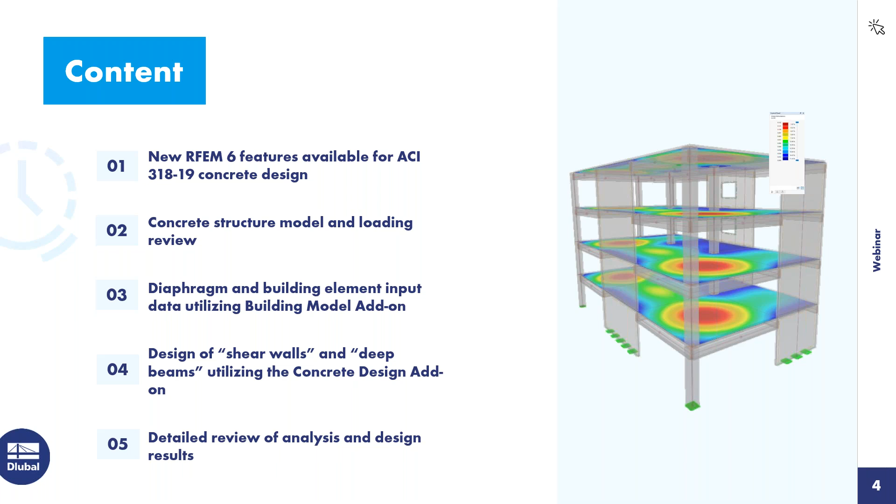So for those of you not familiar with our program and the add-on concept, I do want to quickly explain that for structure design related to concrete. RFEM 6 is the base program. This allows us to fully model the structure. We can integrate with BIM software. We have access to all the materials and the cross sections in the library. And this is also valid for hybrid structures as well. We can load it and then we can get a full static analysis.

If we want to take this a step further to design the columns, the beams, or the surfaces, we do need the concrete design add-on that will carry out the design according to the ACI or the CSA or other international standards. We then have the building model add-on. RFEM is a general FEA program, but this building model add-on will release these building-specific features that give us the ability to define stories as well as shear walls and deep beams.

And finally, there are many other add-ons that will be relevant, but for today, I just want to mention a couple others that will be used in our example for dynamic analysis. This includes the modal analysis add-on and the response spectrum analysis add-on to generate those seismic forces. We won't be going into detail on these add-ons today, but we certainly have previous recorded webinars for both the ASCE 7 and the NBC that go further in depth on this topic.

Turning now to the new ACI 318 features that have been implemented since our last webinar. We now have the ability to carry out the punching shear design check. This is for column to slab and wall end to slab intersections. The current design check will only flag the user if two-way shear reinforcement is required. There currently is no input option for that two-way shear reinforcement, but we do plan to add that in the near future. We also have added additional Chapter 18 seismic design checks. Currently this is reinforcement detailing checks only, but we'll continue to expand on this in the near future, such as strong column, weak beam.

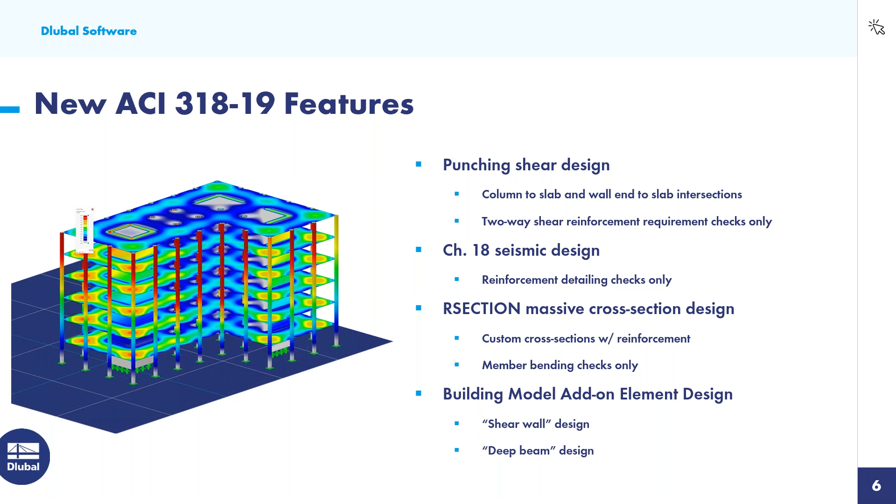And finally, we have the building model add-on that releases these building-specific features. Today we'll be focusing on shear wall design and deep beam design. So on the next slide here, let us talk a little bit more about the shear wall design that we will see in today's example.

So this does require the building model add-on integration in addition to the concrete design add-on. Essentially, we draw these shear walls with 2D surfaces within RFEM. Well, when we define it as a shear wall, what's happening underneath the hood is that a result beam is going to be created. And a result beam just simply sums up the internal forces across this 2D surface and presents it as a beam type manner.

Well, we also can input the reinforcement under the shear wall dialog box. We have added this new cross ties input. Again, we'll see it in our example today. As far as the design checks, we will refer to Chapter 11 for the in-plane design checks, as well as out-of-plane, in particular, Section 11.5. We'll carry out additional Chapter 11 detailing requirements such as spacing, minimum reinforcement, and as mentioned, we also have these Chapter 18 seismic detailing requirements where we'll go ahead and check the spacing and minimum reinforcement requirements here as well.

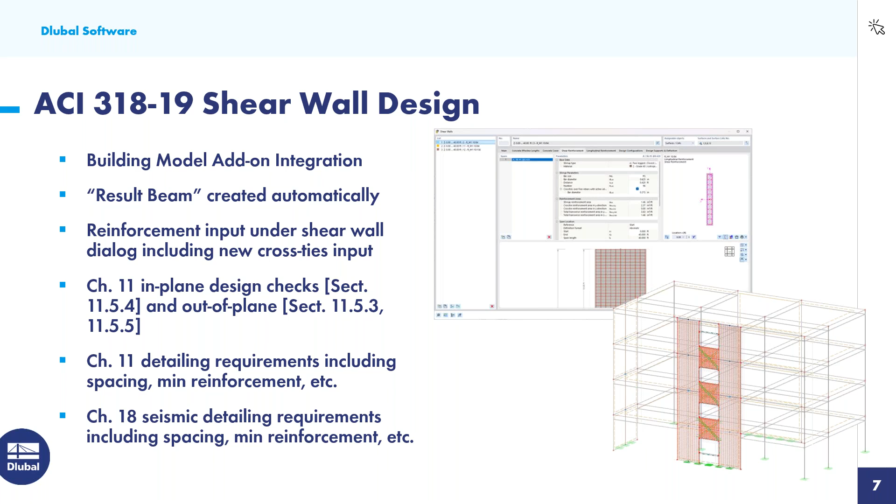Now, deep beam design follows very similar to the shear wall workflow in the fact that we do need the building model add-on integration. Very similar, this is also defined as a 2D surface. We create this result beam underneath the hood, but instead of a vertical result beam for our shear wall, we have a horizontal result beam here to sum up all of the internal forces so that we can easily design this. The reinforcement input options are also available under the deep beam dialog box, and we have added the new diagonal coupling reinforcement input.

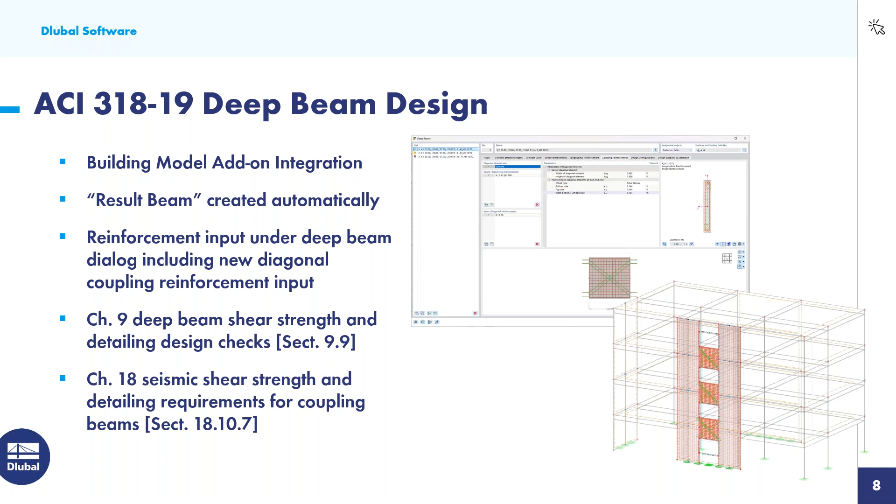As far as the design checks, we will refer to Chapter 9 for deep beam shear strength and detailing design checks, and we can also consider those Chapter 18 seismic shear strength and detailing requirements for coupling beams. So with that said, we will now turn to our example within RFEM.

So when we begin a new model, we are presented here with the base data dialog box. Under the second tab are all of the various add-ons that we have available. So essentially, you're creating a custom software package that's specific for your design needs. Now, for today's example, I do want to begin by enabling the concrete design add-on, and then we also talked a little bit about those dynamic analysis add-ons that we'll utilize in our example here.

Under the third tab for standards, we can generate the load combinations automatically according to the ASCE 7. You'll notice here the latest 2022 standard is implemented. We'll also take advantage of our automatic wind load generators as well as snow load generators. So we can set the standard here under the second option also to the ASCE 7. The concrete design is set to ACI 318, the 2019 standard, but you can see here the alternative standards that we have offered, including the CSA. And finally, dynamic analysis for the response spectrum analysis will be carried out according to ASCE 7.

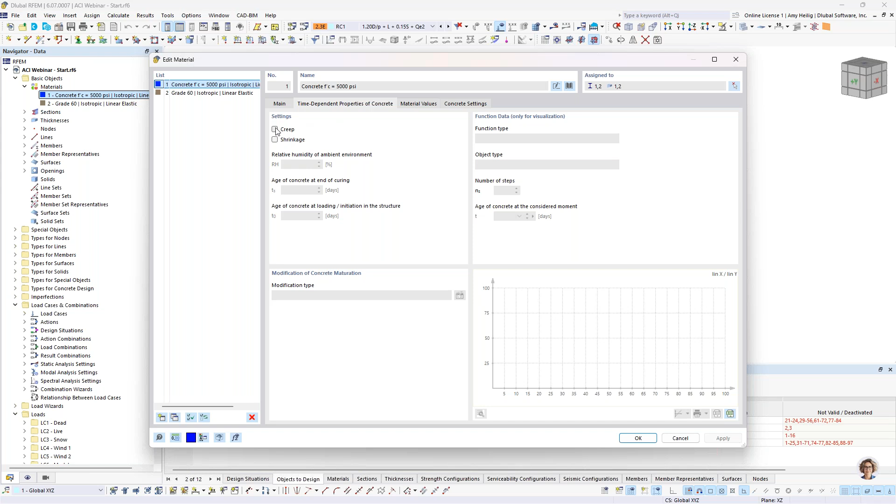So now that we have this information set, you'll notice here that I have gone ahead and modeled our concrete structure for today. So let's do a quick overview. We'll begin with the materials. Everything is defined here with 5,000 PSI concrete that was pulled in from our material library. Now, specific to concrete, we do have this second tab available under time-dependent properties of concrete, where we can further specify the creep and shrinkage behavior of this material. This will come into play later on for those time-dependent deflections. If we do specify creep and shrinkage, we will refer to the ACI 435 for that consideration. For today, I'm not going to take advantage of anything related to the creep or shrinkage input.

So we will now move on to the cross sections. You'll notice here that the columns are defined as 20-inch by 20-inch square sections. And then we have various beams here that are supporting the slabs and spanning in between the columns. Well, if I zoom in here and I double click on one of these members, I want to point out that the member type is not set to beam. A beam is any standard column or beam element, but rather this is set to a rib. And when we specify this under the second tab, rib, we can actually define here the effective width on the left and right hand side of this beam element.

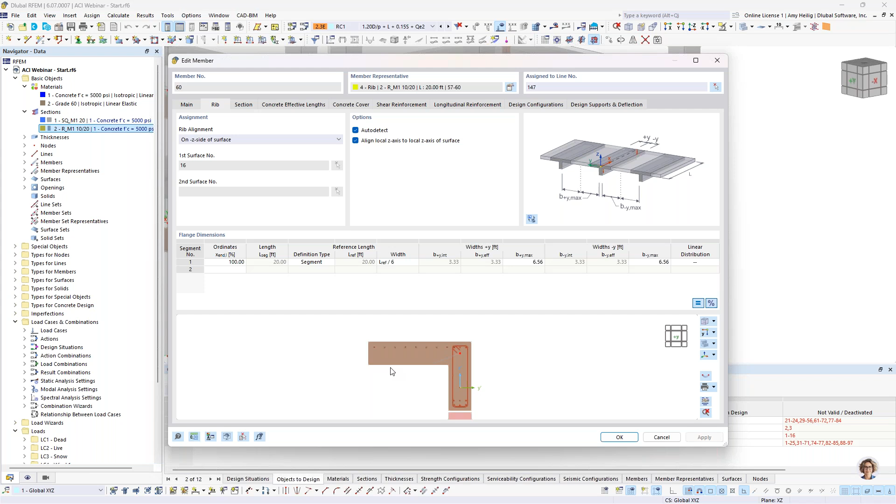So then we further have the ability to integrate the internal forces from the slab element itself from the static analysis, and then we can design it as a T-beam within the concrete design add-on. Now for this rib element, we're at the edge of a slab, so we only have effective width defined here over on the left-hand side. But this is unique to rib elements rather, again, than a standard beam element.

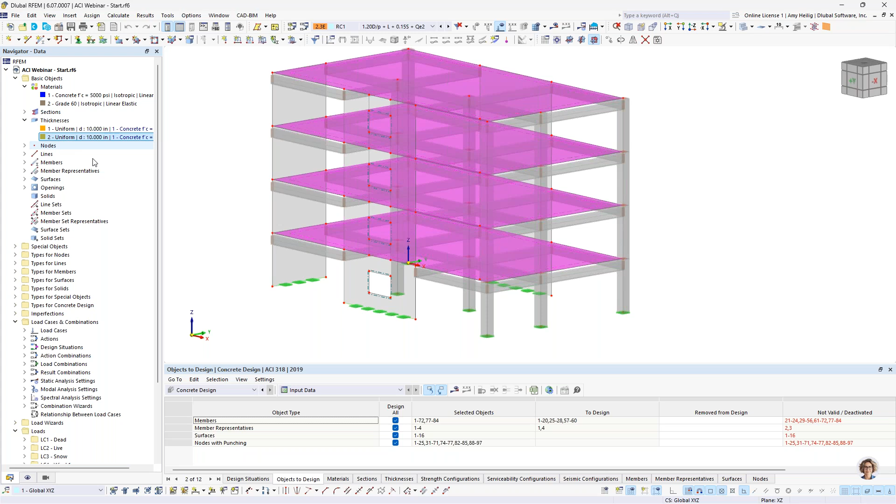We also have the thicknesses defined here. So the thicknesses are assigned to the surfaces. For our shear walls, we have 10-inch thick concrete defined, and then for our slab elements, these are also 10-inch 5,000 PSI concrete. Down at the base of the structure, we have nodal supports at the columns that are rigid, and then we also have a fully rigid support at the base of our surfaces here that are defined as a line support. So we'll now move on to a loading overview.

So going into the load cases and combinations dialog box, you'll notice under the load cases that I have defined here dead, live, snow, and wind. So these are our static load cases that once we have these defined here within this dialog box, we would actually need to apply the loads graphically to the structure. So we'll go ahead and back out here and take a look within our drop down at the dead load case. Now, self-weight is automatically considered internally for all of the elements, but I have added an additional surface load here of 50 pounds per square foot.

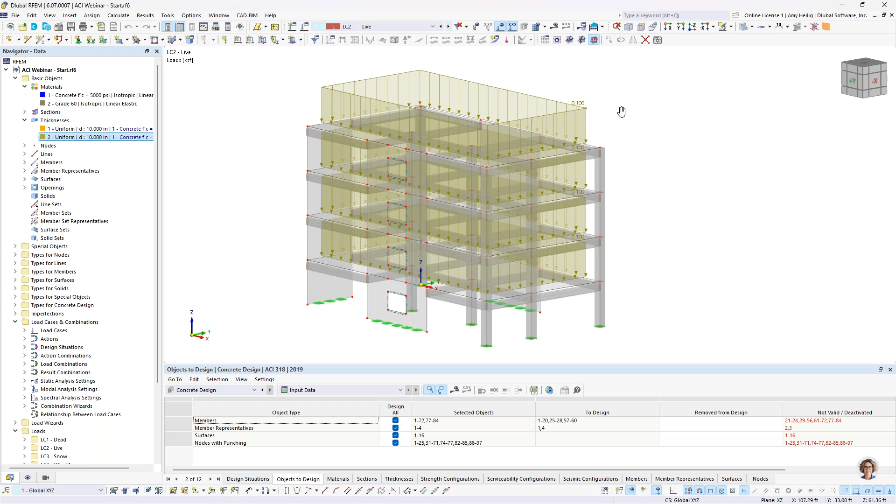Now, we are not confined to applying a surface load, as you can see up here with this option in our toolbar, to the entire surface itself. Rather, we also have these options right next to it called free loads. So for example, a new free rectangular load could be applied to just a certain portion of the surface rather than the entire surface as a whole. We also have the live load case here, same concept. The magnitude for the surface load was increased to 100 pounds per square foot.

Then we have our snow load here at our roof level. And for this, I took advantage of the load wizards that you'll find over here in our dialog box. And under the load wizards, if you remember, we set this to the ASCE 7 so that we can automatically generate the snow and wind loads. So if I go into this dialog box here, you'll notice that we just specified the geometry, we input the parameters specific to the ASCE 7, and ultimately the program is going to calculate these snow loads for us.

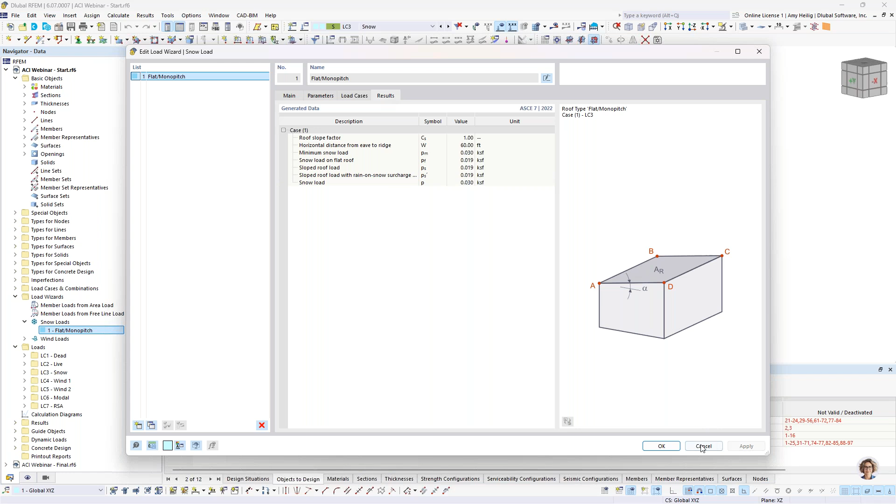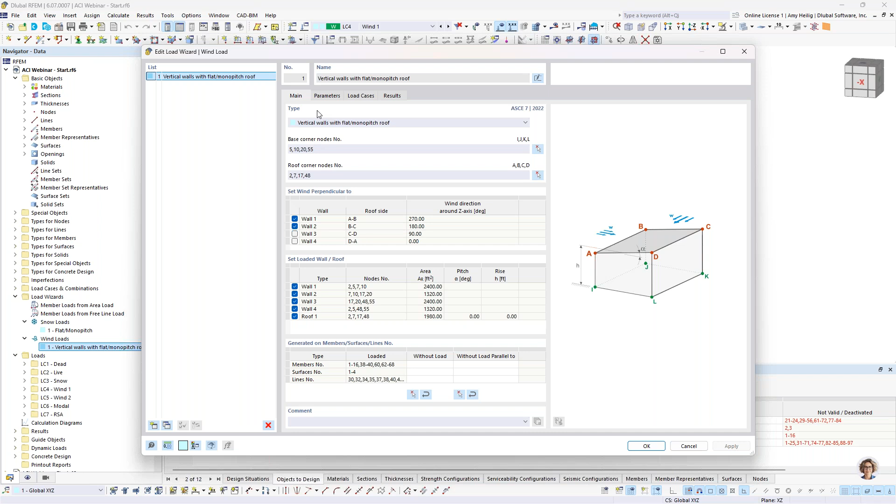Now, very similar, we have our wind load generator. So if I toggle here to my wind load case, we see this applied lateral load. And I'll go into the wind load dialog box here. Again, we input the geometry points, the type of roof. We'll input the parameters specific to the ASCE 7, and then the program can generate all of the wind load cases from case 1 and case 3 from the ASCE 7. For this simple example, I am just generating the minimum wind loads in both directions, so that's why you can see everything else is unchecked here.

So for our first minimum wind load, we can see this applied area load laterally here in the global Y direction. If I'm interested, I can always right click to display separately, which is going to show me the loads applied to the structure based on the tributary areas. Now, if I'd prefer, I can turn this back off if I would like a cleaner area load display instead. And then similarly, we have wind load in the other direction with that applied area load.

So going back to our load cases and combinations, I also have a couple of dynamic load cases here as well. Again, I'm not going into detail with this. This is covered in those previous webinars you can find on both our website and YouTube channel, but we do have a modal analysis load case where we're going to carry out the eigenvalue analysis to determine the natural frequencies, vibrations, mode shapes of the structure. We can import here a mass combination for this calculation.

And then we also have our response spectrum analysis load case. So we're going to refer to the ASCE 7 here to generate these seismic loads in the orthogonal X and Y directions. And ultimately, once we have all of these load cases set, we need to combine them into the load combinations.

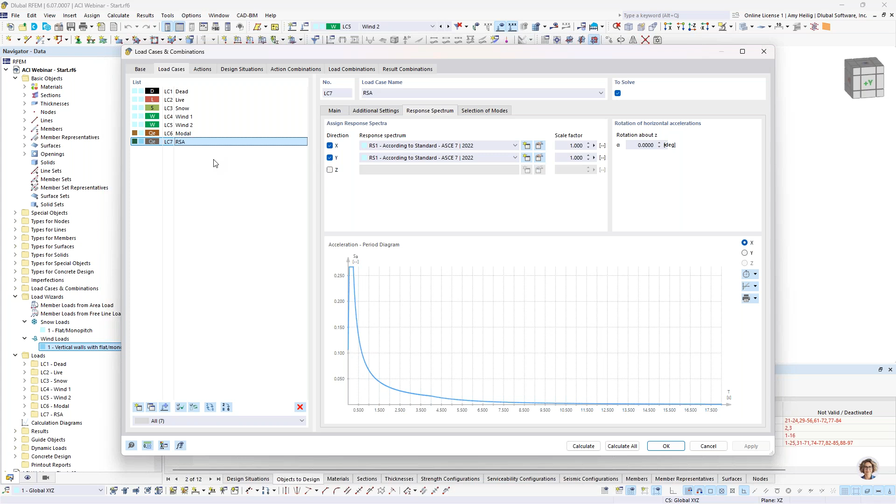So under the design situations here, you can see that the program is automatically going to group together these load combinations in what we call a design situation. So we have our first two design situations here in orange that are going to include our factored load combinations from the ASCE 7, 1 through 5.

And then this second factored design situation is going to include all of our seismic loads. So 6 and 7, again, directly from the ASCE 7. We can click on this little info button here to see that information pulled directly from the standard.

Now we further have a couple design situations here for our unfactored loads. So we have the ASD load combinations 1 through 7, and then we also have 8 through 10 that will include those seismic forces. Now these design situations are ultimately needed within the concrete design add-on, and we'll see later on exactly how we assign the limit states to these different design situations. But for now, just think of these design situations, again, grouping together the load combinations.

If we're interested, we can go ahead and click on the load combinations tab, and we see the load combinations listed out here individually. Our factored load combinations in orange belonging to that first design situation. We have our unfactored load combinations here belonging to the third design situation. And we do also have enabled here the result combination.

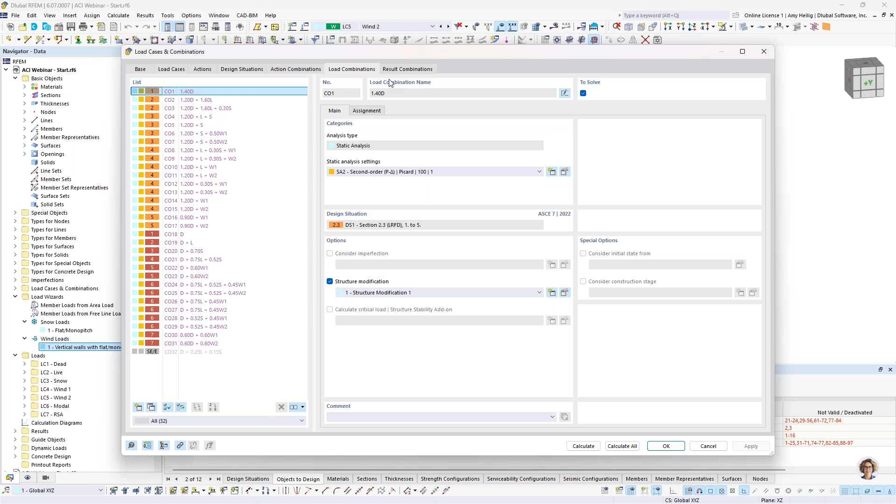So it's not possible to combine the seismic forces with the results of the other static load cases. So what I'm talking about is combining dead, live, snow with seismic. Therefore, we have to combine these results linearly in what we call a result combination. This is different than a load combination that is automatically going to be carried out according to a second order analysis considering P-delta effects. Again, this is covered in that response spectrum analysis webinar, but ultimately these result combinations also belong to those design situations.

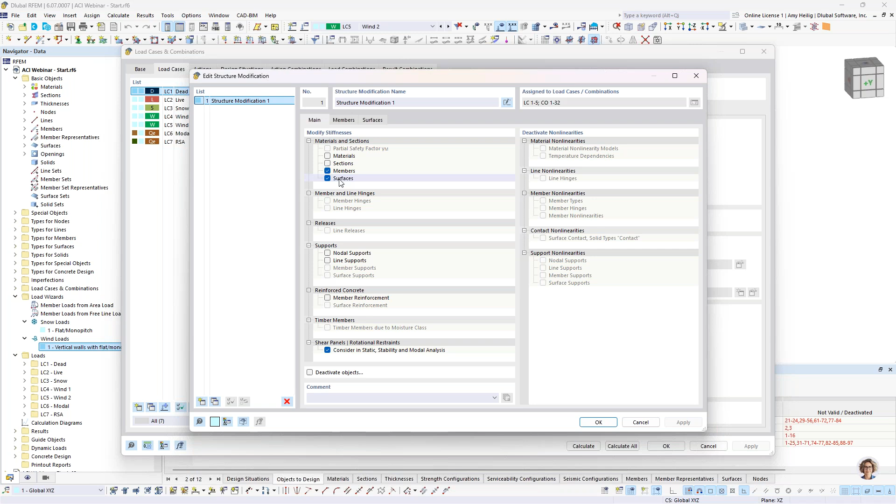So one more thing I want to touch on is that you'll notice that for the load cases, I have a structure modification set here, and this is really important for concrete design. If we go in and take a look at this definition, I have enabled both members and surfaces because these are the two elements that we have in our model today. And then I get two additional tabs up here at the top.

Well, within my first definition type here for members, what we have the ability to do is to directly select here the ACI 318. And this is going to refer to table 6.6.3.1.1(a) to apply those I-crack factors to our member elements within the model. We would want to select whether this is a column or a beam, and we can see the relevant stiffness modification factors given here. So once we have this definition, then we can graphically select all of the column elements within the model that this stiffness reduction should be applied to. Same exact concept here for our beam elements.

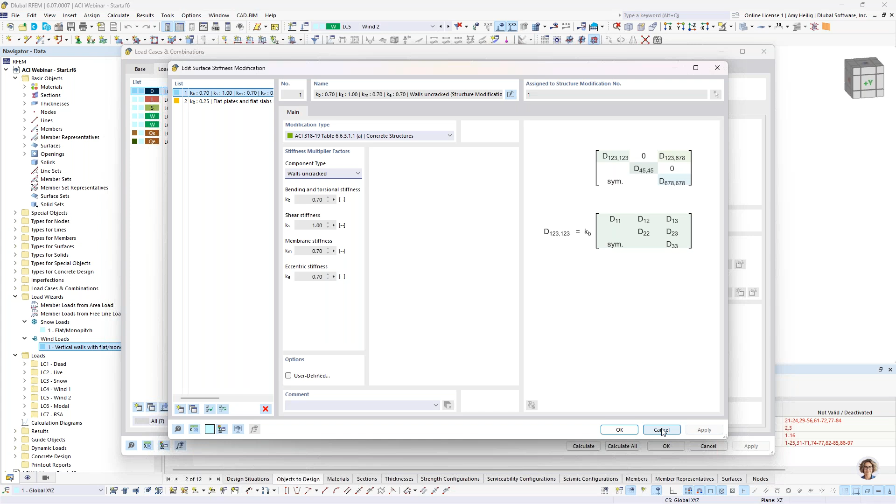And in a very similar manner, we also have the surfaces tab here, where I created my first definition by simply selecting the ACI from this dropdown, and then I would choose whether it's walls uncracked, walls cracked, flat plates, or flat slabs. This refers directly to the ACI for those I-crack factors, and then we can graphically select the surfaces that this stiffness reduction should apply to. So we could go ahead and apply this to all of our load cases.

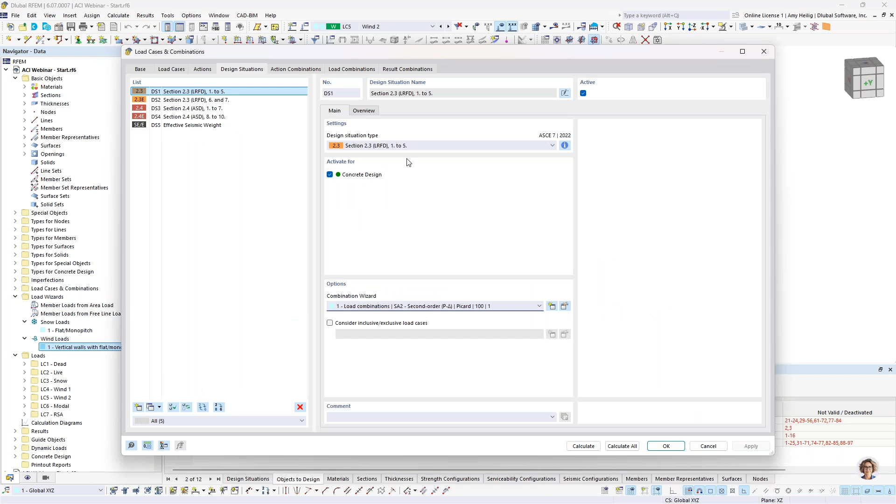It's also possible here under our design situations, especially these factored design situations, that we go in here to the combination wizard options and we activate this structure modification here as well. So by doing it within the design situation, you'll see here that the load combinations automatically include those I-crack factor stiffness reductions as well.

So now that we have covered the loading and the structure, it's now time to input the reinforcement that's specific to the concrete design add-on that we have already enabled within the base data dialog box. So before we begin, what you'll notice here is that we do have the concrete design option available within the dropdown of our table. So when we select this, there is this option here called global settings.

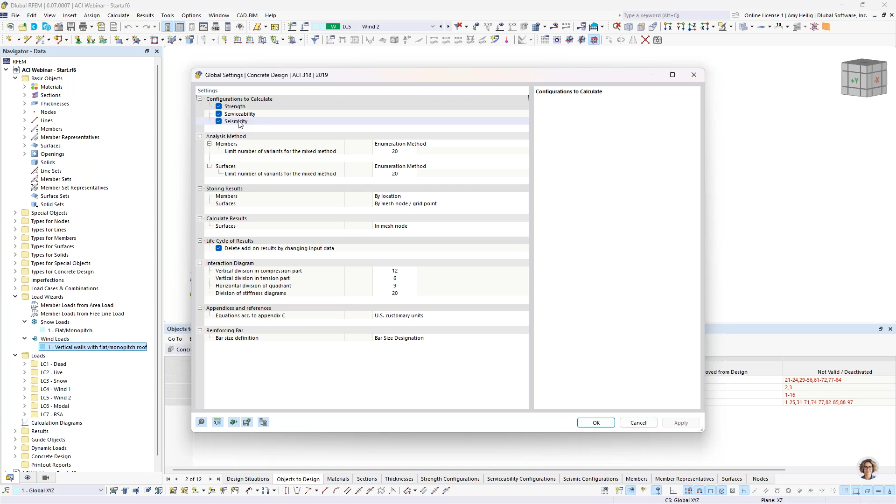Now, by default, the strength and serviceability design checks will always be carried out. But if we are wanting to further carry out those seismic detailing checks, we would want to go in here and turn this on because by default, this is typically not enabled. So we'll go ahead and do that for today.

Okay, so we want to talk about the reinforcement input for a column. If I double click on this column, you'll notice the design property checkbox is turned on. This tells the program that not only are we interested in carrying out the static analysis within the base program, but I also want to utilize the concrete design add-on to input the reinforcement.

Now, when I turn this off, you'll notice all of these tabs disappear, and this simply tells the program that we're only interested in the analysis. So we certainly could carry out the reinforcement input here within this single column.

But I do want to talk about the benefit of what we call member representatives. Currently I have this turned off graphically within the model, so I'll go ahead and turn that on. You'll notice that we have a lot of color-coded dots here for each one of these members. This is because the program has grouped together identical members into member representatives.

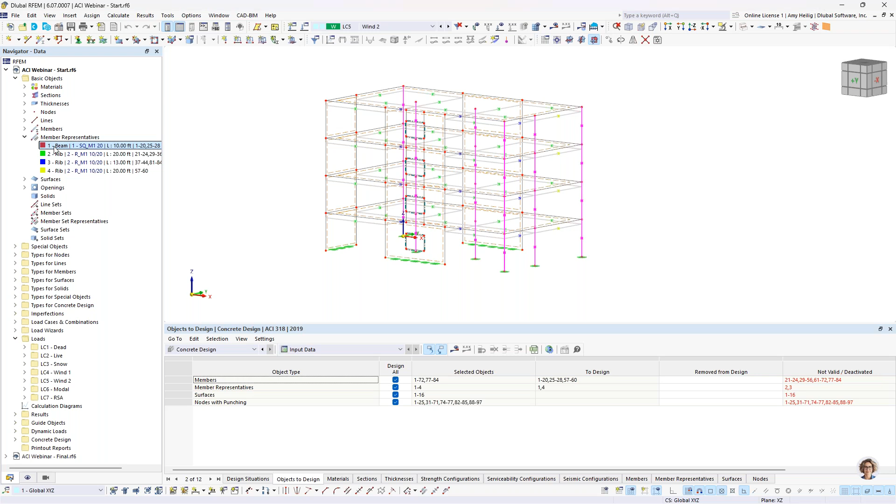So members that have identical cross sections, materials, lengths, and possibly even, for concrete, the same reinforcement input, will all be grouped together. Now the benefit is that if I take a look at member representative number 1, you'll notice that this has grouped together all of my columns. So we see this highlighted in the background.

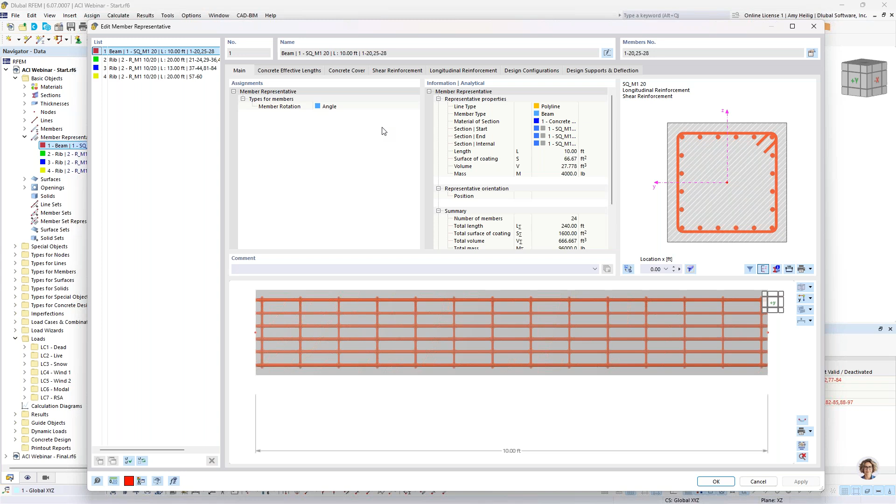I have these exact same tabs here to input the reinforcement as I do for the individual columns. The benefit is that if I define the reinforcement here within the member representative, it's applied to all columns at once. If I need to make a change, I do it within the member representative, and it will affect all the columns defined here. So we will go ahead and input these various tabs, and I'll go through these in detail.

The concrete effective length: if we are carrying out a first order analysis and utilizing the moment magnification method, we would want to go ahead and input an effective length. However, if we are designing to second order analysis and considering P-delta effects, which we are within our load combinations today, we don't really need to do anything within this particular tab. So we'll go ahead and design according to second order analysis.

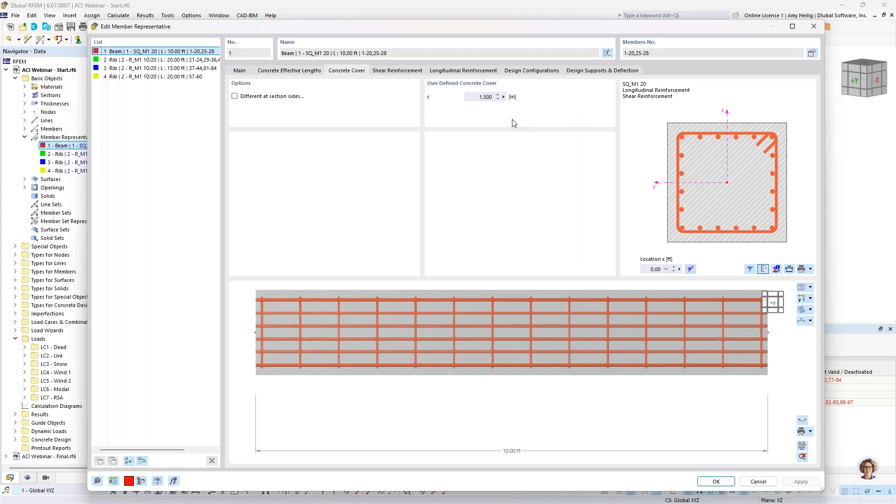Now the concrete cover should be input. This is left here at 1.5 inches, which is the default.

Now I went ahead and input the shear and longitudinal reinforcement for these members, so we'll just go ahead and give a quick overview. The shear reinforcement is set at number 4s at 9-inch spacing on center, so we can see that spaced out evenly along the member here.

Now it's entirely possible to create different zones for both our shear and our longitudinal reinforcement with this option in the lower left-hand corner, and then we can modify the span location. So for example, if we wanted closer spaced shear ties at the ends of the member versus the center, we could create a couple of different zones here.

The longitudinal reinforcement: you'll notice I have selected the option from our dropdown here as uniformly surrounding for the longitudinal bars, and I have defined 20 number 6 bars, so the program will go ahead and place these around the cross section as shown.

Now we do have additional options here to define a development length if we would like. You can see that within the dropdown box where the development length is shown graphically. We can modify that development length itself in terms of feet. For today's example, I'll go ahead and leave all the development lengths off, but that is where you would want to input that information.

Now, the design configurations - I'm only going to go through this tab once because it's the exact same application for all elements we are designing. We have here these strength configurations to begin. If I go into the default setting, you'll notice we have 4 different tabs depending on which element we're designing, whether it's a member, surface, or even punching shear. These are all the various options specific to the strength design checks according to ACI.

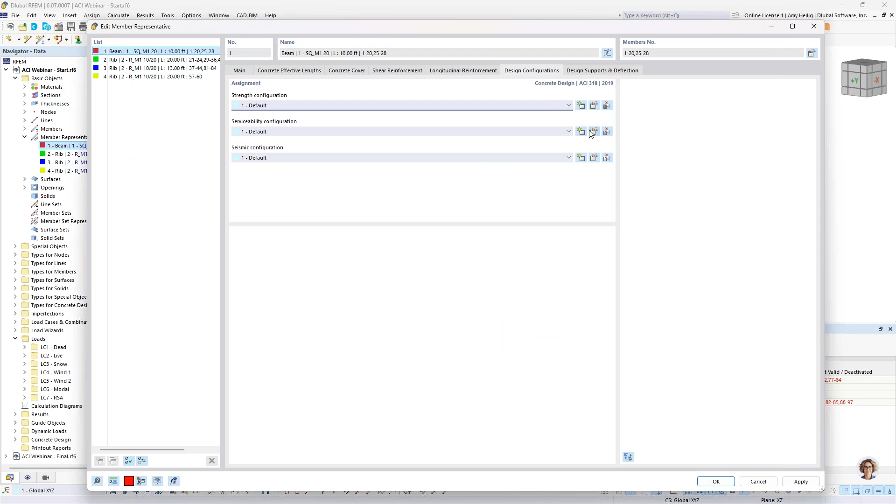We also have the serviceability configurations here, specific to the serviceability design check. For example, we can calculate the crack width. For surfaces, we have minimum reinforcement due to shrinkage and temperature. We can also check deflections, whether that is simply supported or cantilever beams or columns, and this can also be carried out for surfaces.

If you remember, we talked a bit about time-dependent deflection. I mentioned that under the material properties, when we input creep and shrinkage for that material in more detail, we probably want to toggle this to refer to ACI 435. This is a far more complex approach within the serviceability design checks for long-term deflection.

Alternatively, when we leave this as default with the factor according to ACI table 242413, we're simply going to apply some type of factor to the immediate deflection based on the duration of the load. A much more simplified approach.

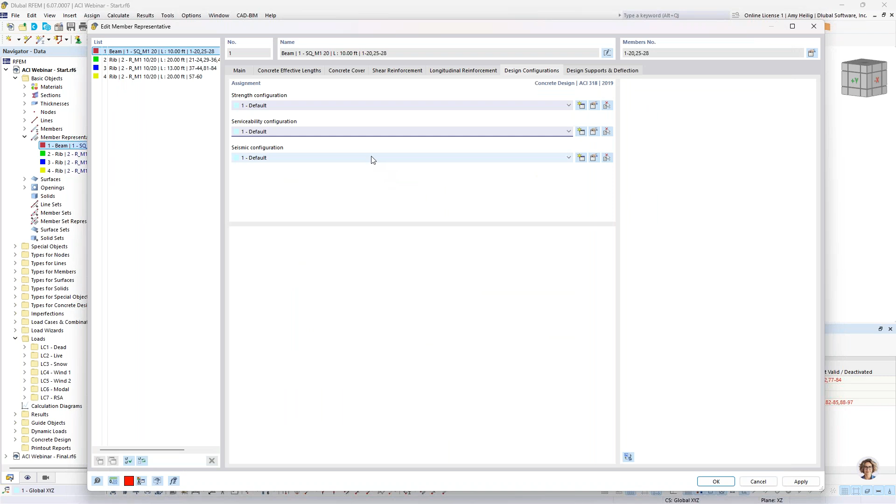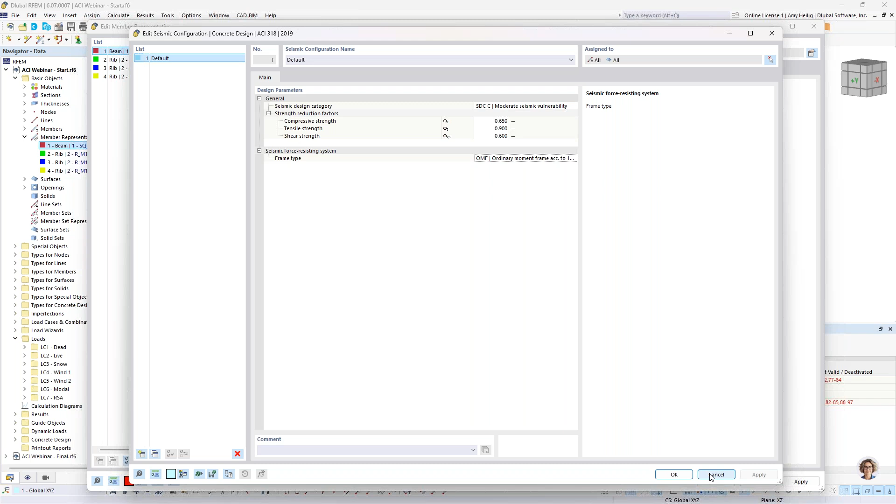Finally, we have the seismic configuration. For the seismic detailing checks, we can select for our members whether the seismic design category is one of the options from this dropdown. We also have the frame type set to ordinary, intermediate, or special moment frame, and again this is applicable to members and surfaces for those additional detailing design checks.

Finally, we have design supports and deflection. If I input nothing within this tab, the program will simply assume the member is supported at both ends, and it will refer to the limiting deflection ratio for simply supported members. In contrast, if we have a cantilever, we probably want to assign a design support at the left or right end so that the relevant deflection limit is referred to.

I am just going to leave this as simply supported for our column elements, but we'll see in a minute how we can set this differently for our rib members.

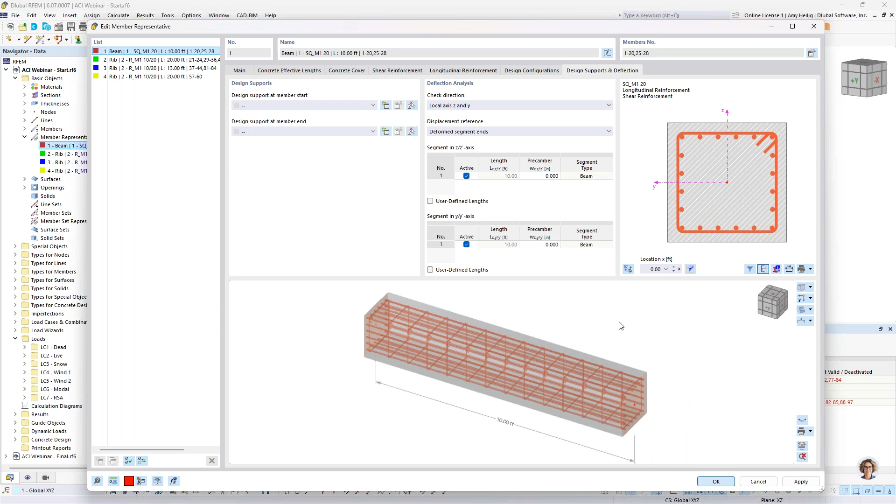Once this information is done, we want to move on to the reinforcement input for our 4 rib members over here on the right-hand side. Very similar to the columns, these are all grouped together in a member representative as well. If we take a look just to quickly review, because it's a rib member, we are going to include the effective width of the slab for the member design.

We run through these various tabs. Concrete cover is set to 1.5. The shear reinforcement is number 4, set at 6 inches. Again, we could set different zones if we would like. The longitudinal reinforcement is going to be a little bit more detailed than what we saw with the columns.

You'll notice that I have 3 number 6s set to symmetrical, so this places 3 number 6s at the top and 3 at the bottom that are currently highlighted. We also have an additional 3 number 6 bars defined here at the bottom with what we call the rebar type line.

This line option allows me to place a line of reinforcement, and I can specify the different offset either left or right or top or bottom with this input option. Finally, we have 8 number 6s defined in that surface effective width itself, also defined with the line option. I modified the offset to 8 inches so we can input this longitudinal reinforcement within the slab element. This is pretty simplified for today, because we'd probably want to create different zones with different longitudinal reinforcement, but this is just a little overview for this simple example.

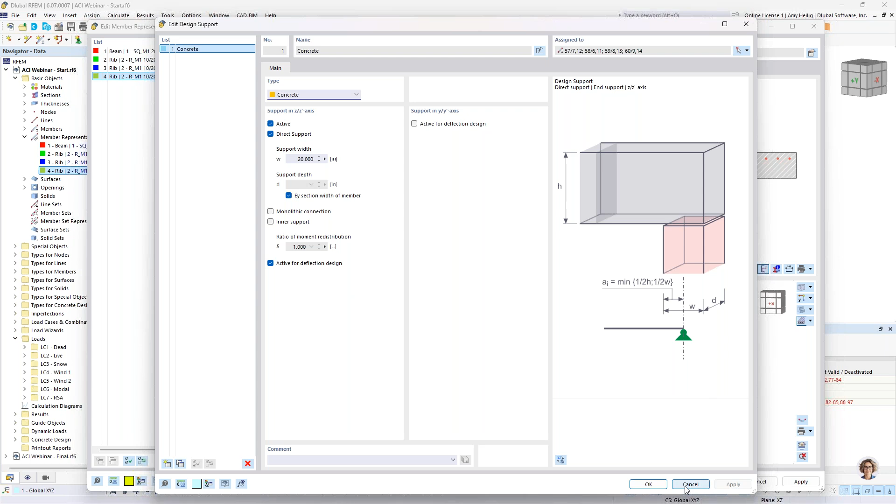So once we create that support, we can select that same definition type here at the member end, and we actually see the support shown graphically in this dialog box. So this is how we can consider that reduction of the shear force.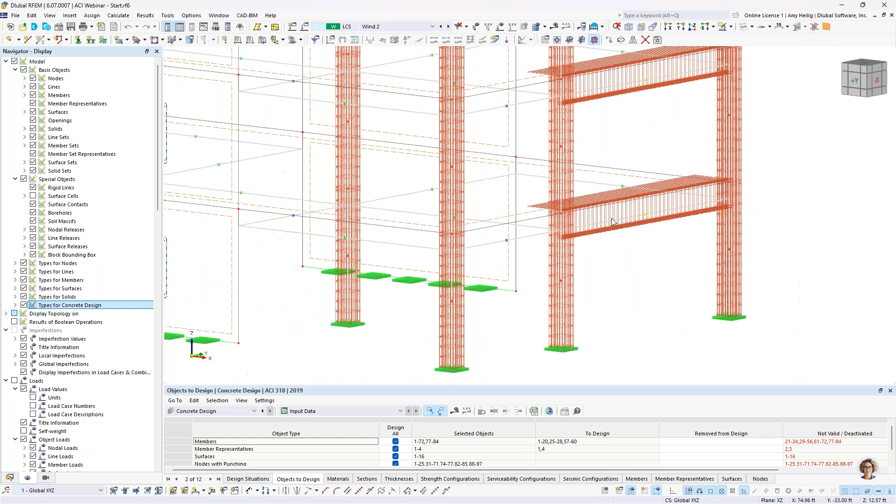Now that this information is input for our beams and columns, if I go to the second tab under the navigator and turn this into wireframe view, we can view the reinforcement that we've input graphically in the global 3D model. This is only specific to the elements I've defined so far. If it feels overwhelming, you can always turn that off.

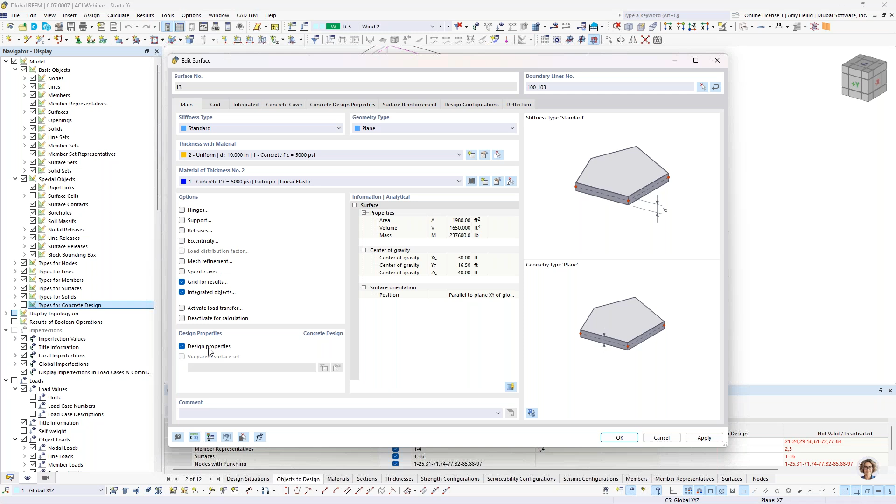Now to talk about the surface reinforcement, I'm not going to go through this in detail. It was covered in a previous webinar, but it's the exact same concept where we can activate the design properties and input the surface reinforcement.

Similarly for punching shear checks, we want to choose one of these nodes where it's framing into the reinforced slab. We double click on it, and we have a checkbox for punching design and an additional tab that refers to the strength configurations for those punching design checks. We won't be doing either of those for today's example, but I wanted to mention it.

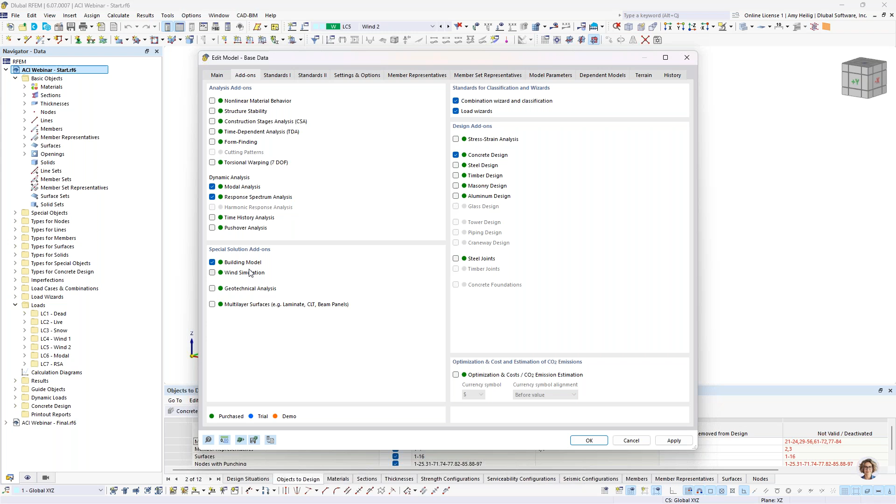So now it's time to move on to the building model add-on. I want to right click here to activate the base data dialog box, and under the add-ons we'll turn on the building model add-on. I click OK, and at first glance nothing changes graphically here.

The only thing we now have access to in the navigator on the left is a new folder called the building model, so we can now define our building stories in this general FEA program. I'll go ahead and double click on this dialog box.

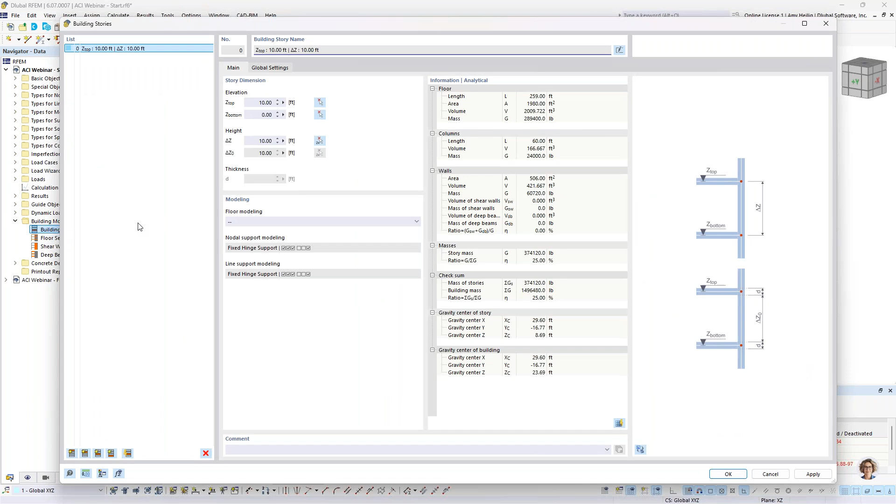The program will automatically assume we want to create our first story, and it detects the height of that first level. We'll continue to create the additional stories above it using the option in the lower left-hand corner, for a total of 4 different floors.

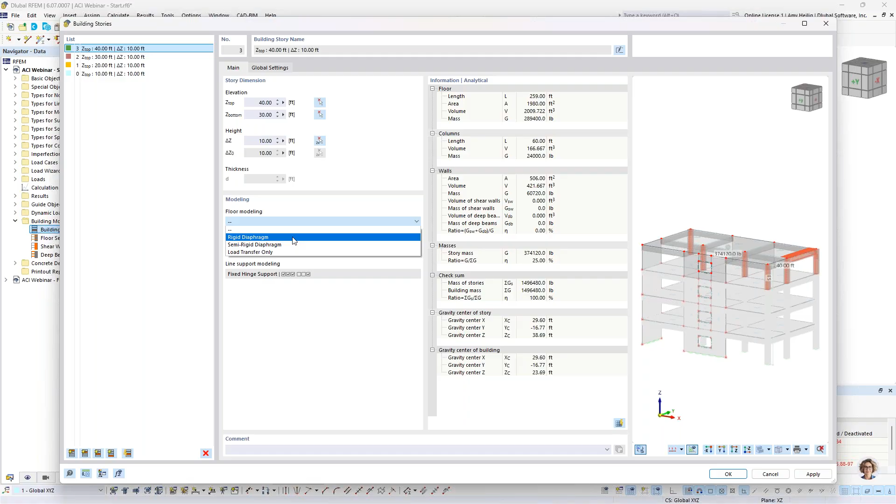Once we've created the different stories, for each floor we now have the ability to assign a diaphragm to that particular floor or to all of the floors, including rigid, semi-rigid, and load transfer only. Let's go back to the PowerPoint because I want to discuss the building model add-on concept in more detail, as well as these different diaphragm options.

As mentioned, RFEM 6 is a general FEA program. We are not restricted to only building analysis and design. Rather, we can model tanks, silos, fabric tensile structures, maybe an FEA of a steel connection—really anything is possible. But this building model add-on is releasing building-specific features in this general FEA program, such as the ability to define stories.

We also have the option, which we'll see in just a minute, to define shear walls and deep beams. The added benefit of the building model add-on is that once we run the static analysis and even the dynamic analysis, we get additional results available in table format for results by stories.

For example, if we're looking at a response spectrum analysis, we can view the story shear or the base shear in table format. For static or dynamic analysis, we can also view the shear wall forces in table format and export that to Microsoft Excel quickly. If we have a rigid diaphragm, we can view in the table the center of rigidity, as well as graphically where that center of rigidity occurs. Many more options specific to buildings will be released.

Now, as mentioned, we have various diaphragm types available. We recently released semi-rigid diaphragms, so now we have all 3 options available to you: rigid, semi-rigid, and what we call load transfer only, otherwise known as a flexible diaphragm.

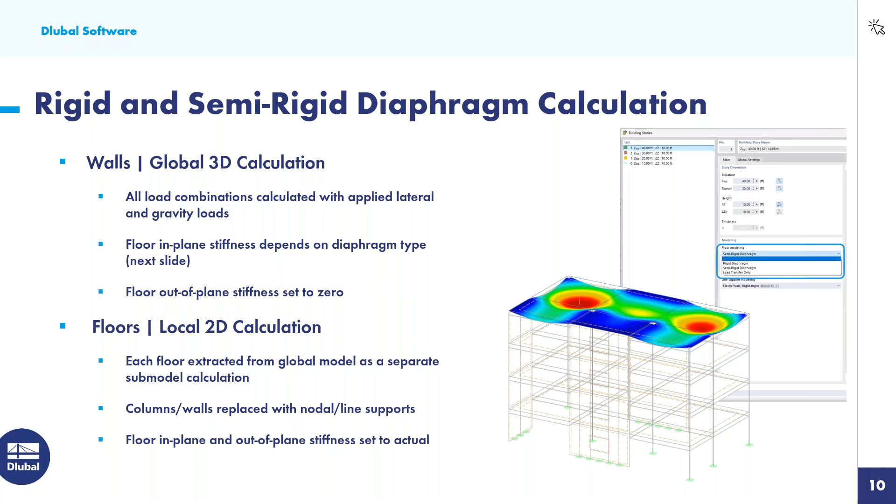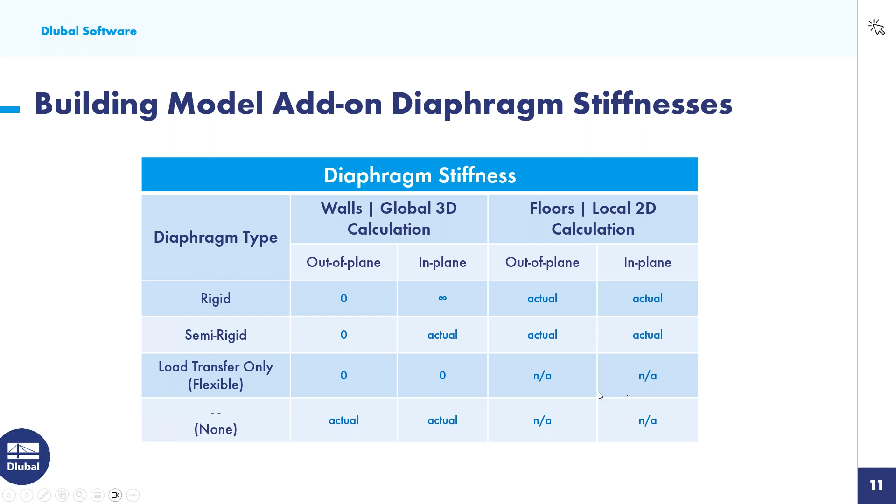So we'll go back to our example today, and for all 4 of my floors, I'm going to define here a semi-rigid diaphragm. Now remember, for rigid or semi-rigid diaphragms, when we carry out that separate 2D calculation, we're replacing the walls and the columns underneath it with line and nodal supports.

Well, rather than having those line and nodal supports set to fully fixed or fully released, the program can actually calculate the true stiffness of those elements framing up underneath it, and we can create an elastic support condition here with a spring stiffness set. So that's what I'm going to go ahead and use today. I want the program to refer to the true stiffness of those elements framing up underneath it.

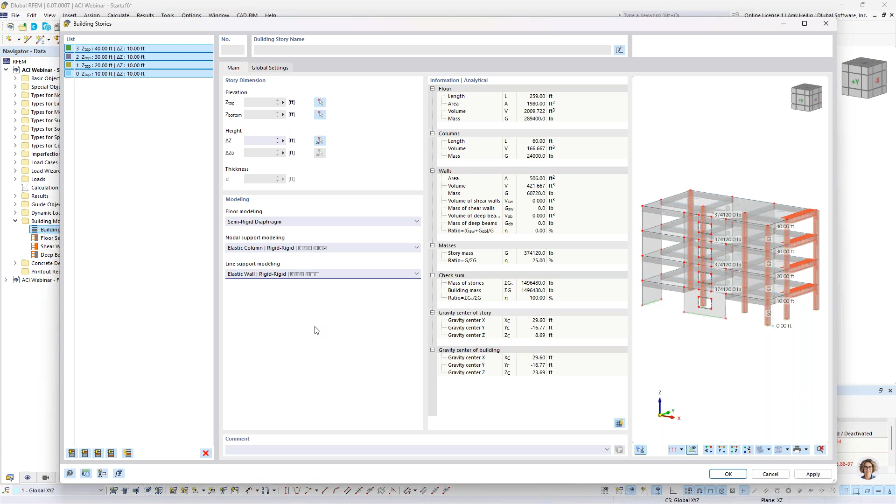Okay, so once we have set this information, what you will notice here is that if I double click on one of my floor elements, the stiffness type is now set to floor slab semi-rigid diaphragm. I can't modify this because this is defined directly within the building model add-on.

Now, in addition to the building stories that have been defined here, we now have the ability to create our first shear wall definitions. So before we do, I'm going to activate what we call the surface cells. I had turned them off graphically, and I'll go ahead and turn those back on. Surface cells are automatically turned on when we enable the building model add-on. And you can see here that it creates these surface cells at various portions of the structure on the surface elements themselves.

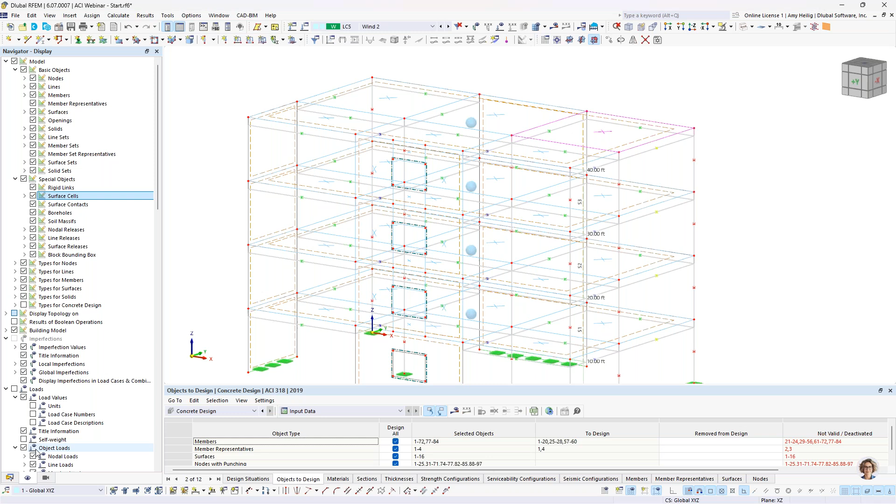Well, I'm going to turn this into an elevation view here, and I'll go ahead and highlight only my front shear wall. So here we have our 4 shear walls displayed graphically, and you'll notice that those surface cells for the shear walls at the 2nd, 3rd, and 4th level are shown. And this is really helpful because this will help us define what is a shear wall on the left and right hand side versus what's a deep beam that's spanning in between these openings.

Now, for this first shear wall, you'll notice that I don't have those surface cells. So anytime that you have a shear wall with an opening, what we need to do in order to generate these surface cells is to actually create a line element that spans from the opening to the edge of the surface. Now, we certainly can do this manually with a new line option up here in our toolbar and just graphically drawing that line. But I'd like to show you a quick trick here.

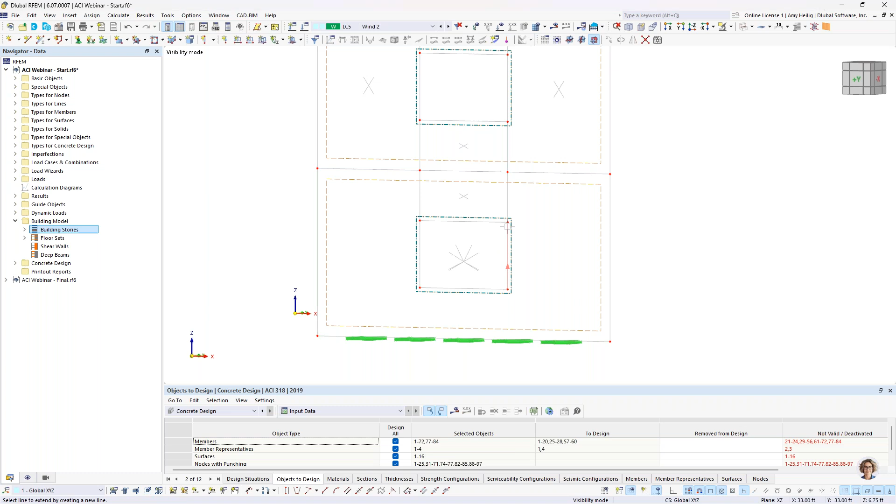With our drawing tools down at the bottom, we have this option to extend the line graphically, something that you might find similar in AutoCAD. When I choose this option and I hold down the Alt key on my keyboard, the program will automatically extend this line when I click on it, the upper left and right hand sides, without affecting the opening. And I'm going to do so here at the bottom right and at the bottom left.

And now you can see that those line elements are automatically created, again without affecting that opening. And the surface cells were automatically detected when we do this. So in case you have a shear wall with openings, you certainly want to take this workflow.

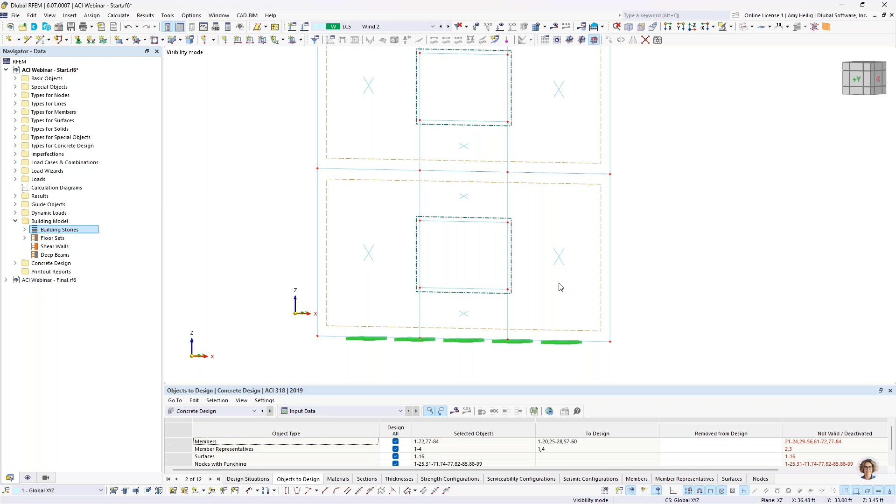So now we can define our first shear wall by right-clicking within our building model folder, and we create our first shear wall definition. And we want to select here the surfaces or the surface cells. So I will graphically select all of my surface cells on the left-hand side of this opening to define one continuous shear wall on the left-hand side. Once this is done, I'm going to create a new definition type here. I'm going to do the same thing on the right-hand side of the openings. And we have one more shear wall definition.

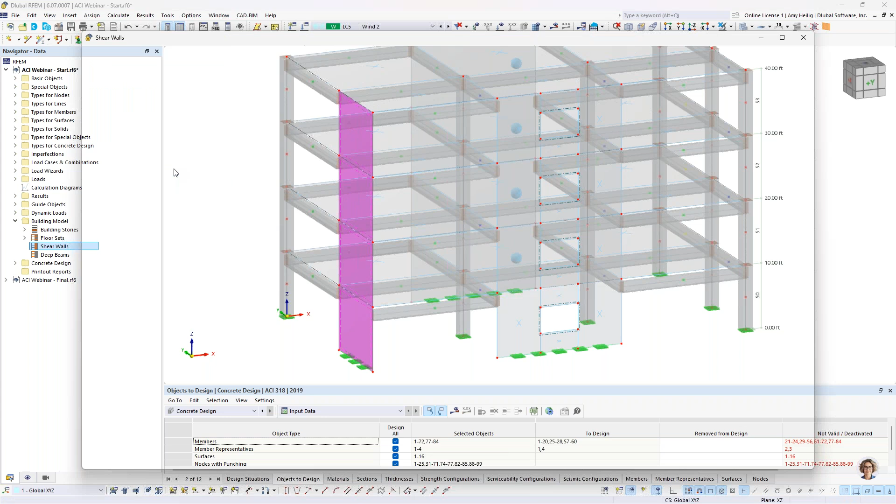And for this one, I'm going to cancel out the visibility and go back to a rendered view because I want to create my third shear wall over here on the left-hand side. Now notice this one doesn't have any openings. Therefore, we can just directly select the surface itself without having to worry about the surface cells. So once we have input the shear wall definitions, we can hold down our shift key to select all of them, because I'm going to input the same options here for all 3 shear walls at once.

Now, the first option here is to generate the results section. Remember, I talked about how that result beam is created underneath the hood. Then we can present the internal forces that are summed up over these surfaces in table format. So that's just what we're enabling here for the static and dynamic analysis. Now, very similar to our columns and our rib elements, we want to turn on the design properties because we'd like to design these in the concrete design add-on.

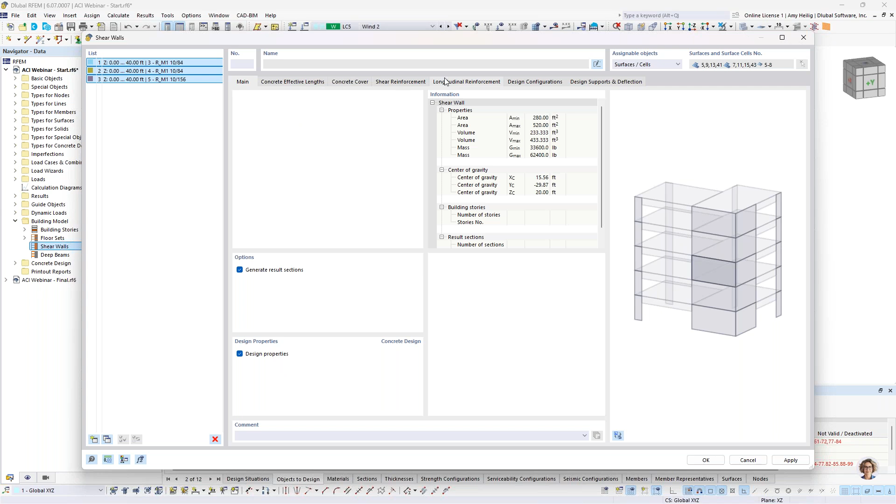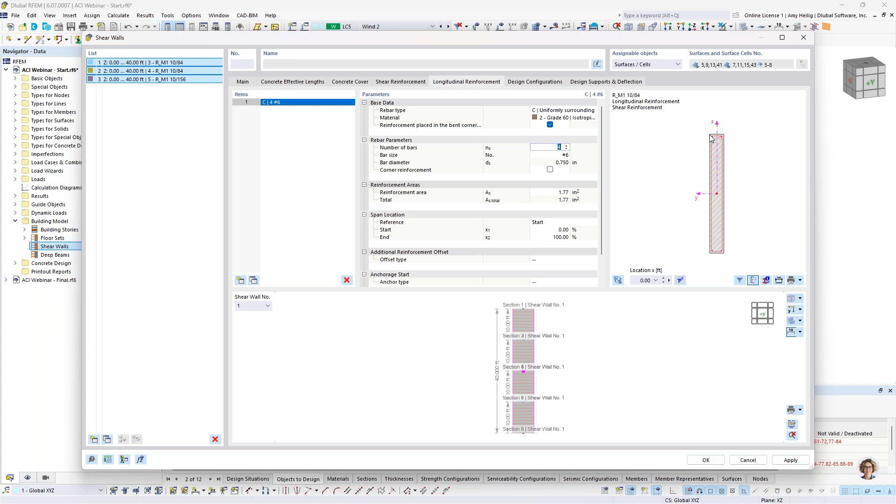And then we have the additional tabs up here at the top. So the concrete cover is going to be set at 1 inch for our shear walls. I'm actually going to jump here to the longitudinal reinforcement first, and I'm going to select here the option uniformly surrounding. And with this option, I want to go ahead and place the reinforcement at the bent corners here of my stirrup, and then the number of bars is going to be set to 22 number 7s, and I select number 7 bars from my drop-down box here.

So then the program just places these longitudinal bars all the way around the shear wall. We're kind of looking at it in a plan view here. Now, the only modification that I want to make is to shear wall number 3. This certainly has a much longer width to it than the first couple shear walls, so we'll go ahead and increase the longitudinal reinforcement to 40 number 7s, and we see graphically that adjust here.

So now going back to the input for all 3 shear walls, we'll go back to the shear reinforcement. So with the shear reinforcement, I am going to select here number 5s from my drop down, and I'm going to adjust the spacing to, let's say, every 5 inches, so 0.417 feet. And this is a new option that we have added within the shear walls, is to go ahead and generate what we call the cross ties when I activate this checkbox. So now we see those cross ties enabled across all of the longitudinal bars here.

Now, if you perhaps do not want to consider a cross tie at any one of these locations, you can just graphically click on the longitudinal bar here over in our preview, and that cross tie will be deleted. If you want to go ahead and add it back in, you just click on the longitudinal bar again, and you'll see that cross tie considered.

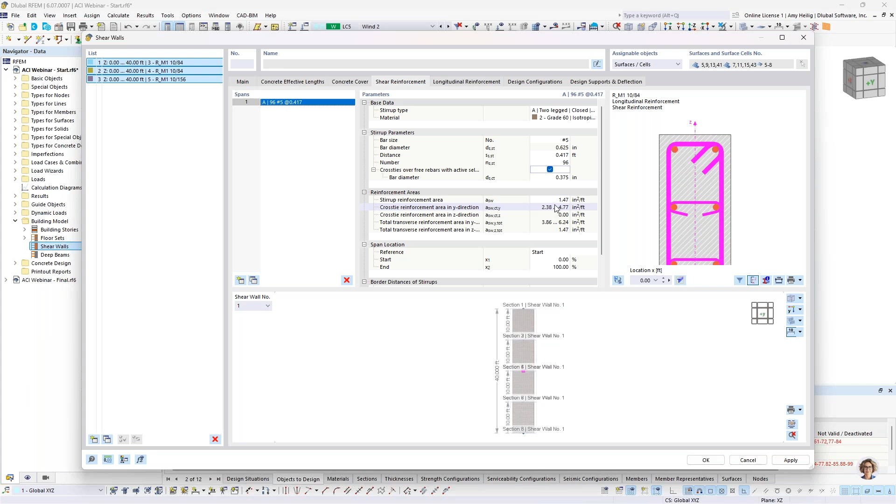Now, lastly, we have the design support. So very similar to what we saw with our member elements, we can also add design supports where it's framing into the slabs or the floors along the height of our shear wall. So for the start and end of the shear wall, I'm going to create a new design support of the type concrete. The support width is going to be set to 10 inches because this is how thick my slab is that's framing in the transverse directions.

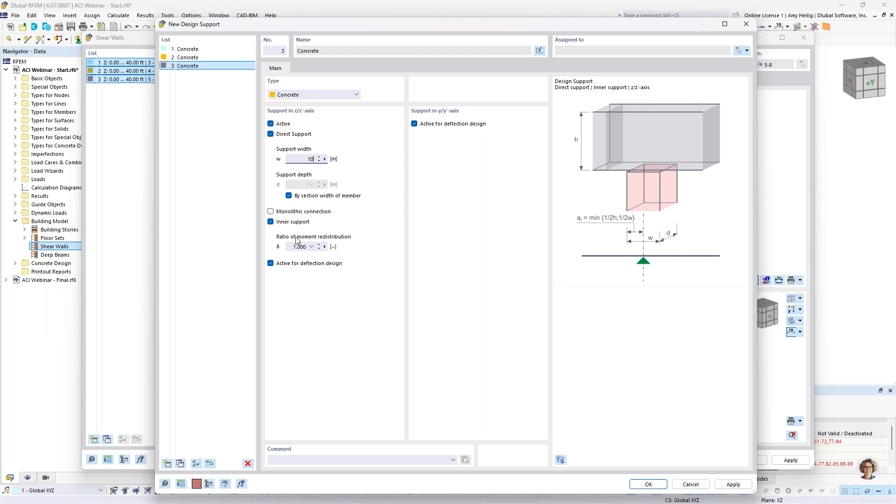For this one, it will not be an inner support. I click OK, and then I can select this new definition within my dropdown, and we actually can zoom in here and see that design support shown graphically at the start and end of the shear wall. Now for my interior support, we can go ahead and create a new definition type. Again, very similar, 10 inches in width, but this time it will be an inner support. And we can go ahead and select this from our drop-down box here for all of the interior support options.

Now you can also hit F8 on your keyboard to copy the cell from above into the current cell. But now we see those support conditions modeled along the height of the shear wall, again representing those slabs kind of framing in at those transverse locations.

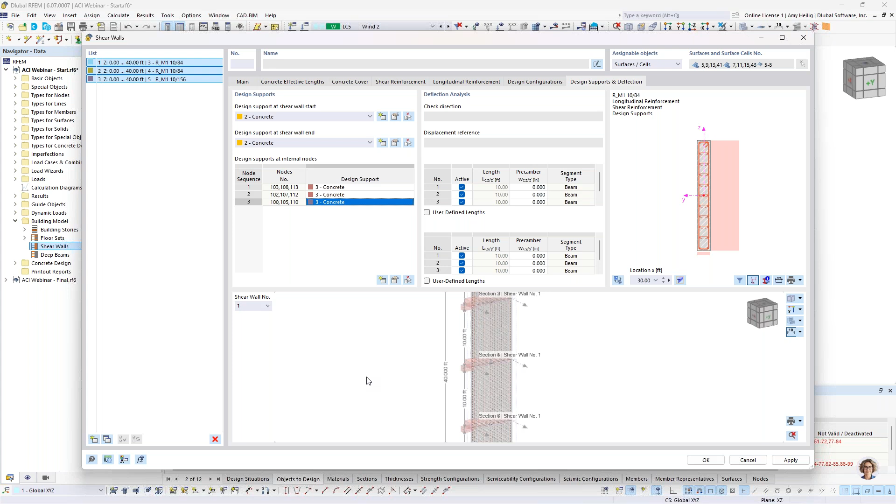All right, so now that we are done with our shear wall input, let us talk about deep beams. So this is really going to be a very similar workflow. We're going to begin here by right-clicking to create a new deep beam. And the program will ask us which surfaces or surface cells we want to consider. So I'm going to zoom in here and choose the 2 surface cells that are spanning between the openings of my first and second floor.

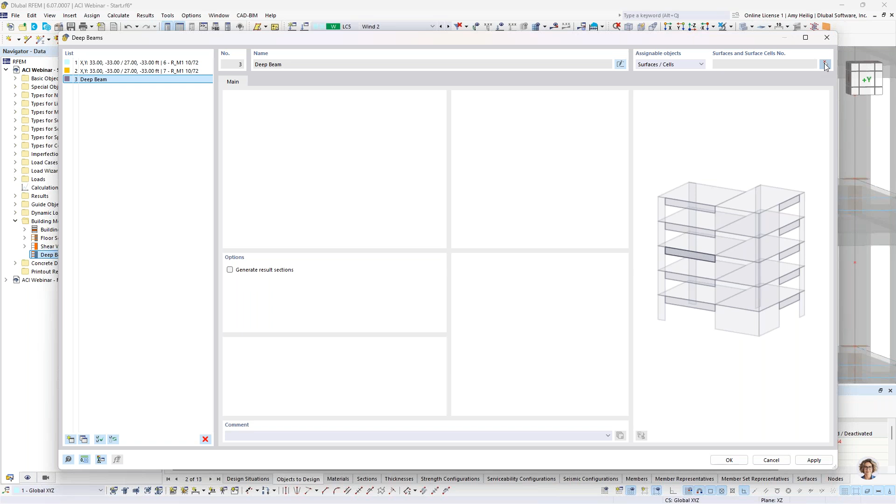I'm going to create my second deep beam that will go ahead and span between the openings of the second and third floor. And finally, we are going to create here our third deep beam that spans between those upper floor openings. And I'm going to highlight all three of these to generate the results sections and also to turn on the design properties with the coupling reinforcement that is going to be specific to deep beam input.

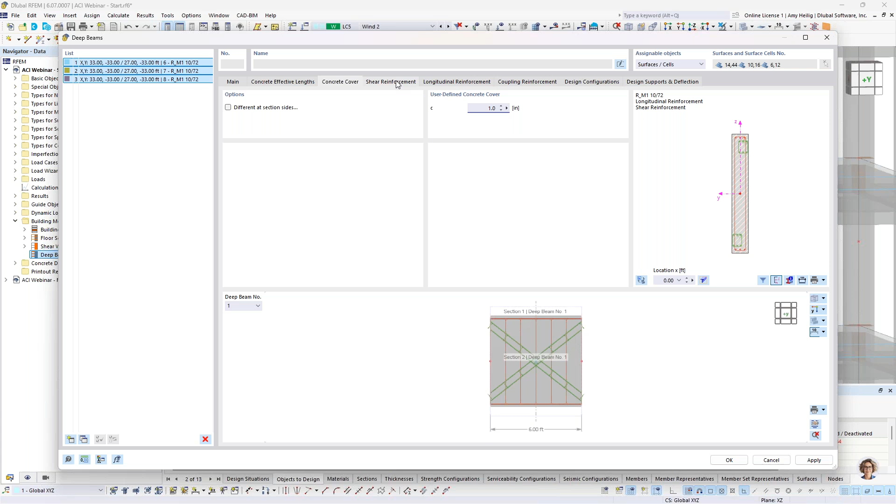The concrete cover, we'll go ahead and modify this to 1 inch. And then we have the shear reinforcement. So I'm going to specify here number 5, similar to our shear walls, at 0.417 foot spacing. We further have our longitudinal reinforcement. So for this one, I am going to select here from my dropdown, uniformly surrounding.

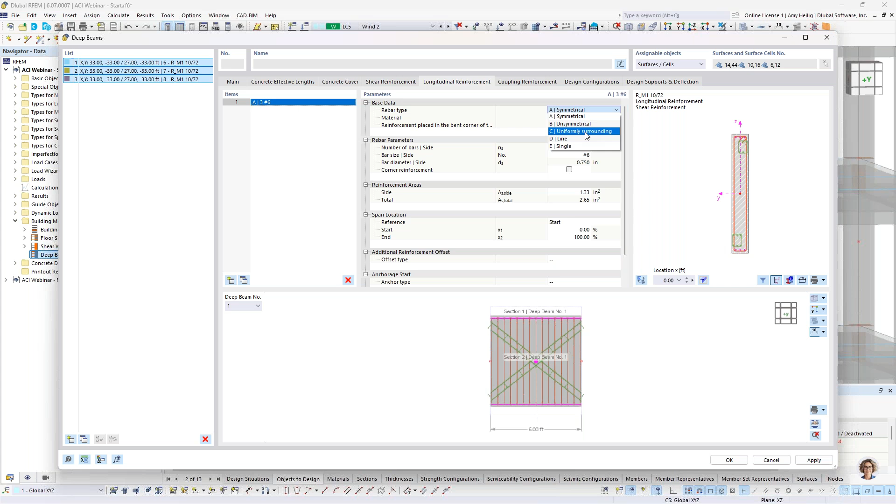And we're going to go ahead and place those rebar at the bent corners here of the stirrup with this checkbox. I'm going to select 30 number 6 bars. So the program will go ahead and place those evenly around the perimeter of this deep beam.

And finally, we have the coupling reinforcement. So again, this is new, specific to the deep beam design. So you can see here that the first initial input is going to be the transverse reinforcement. So as I click on it, it's highlighted here just to kind of bundle these diagonal bars together. The default here is number 3 at 1 foot on spacing. We'll go ahead and leave this as default.

Then we also have the diagonal reinforcement itself that we can kind of view here, or we can zoom into the cross-section view. So this is going to be 3 number 6 bars set at both the top and the bottom. Now, additionally, we can set an anchorage or development length on either side of this reinforcement. So if we wanted to go ahead and do that, we would select the anchorage type straight. And we could also modify here the length to maybe 1 foot.

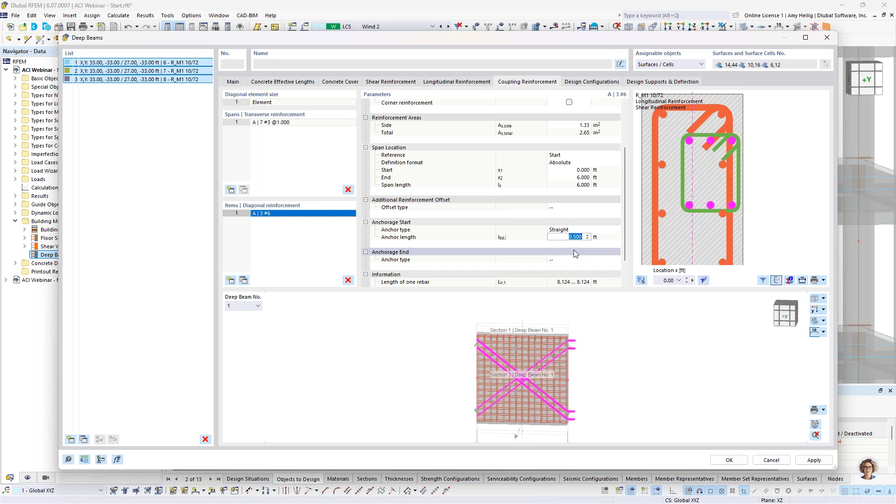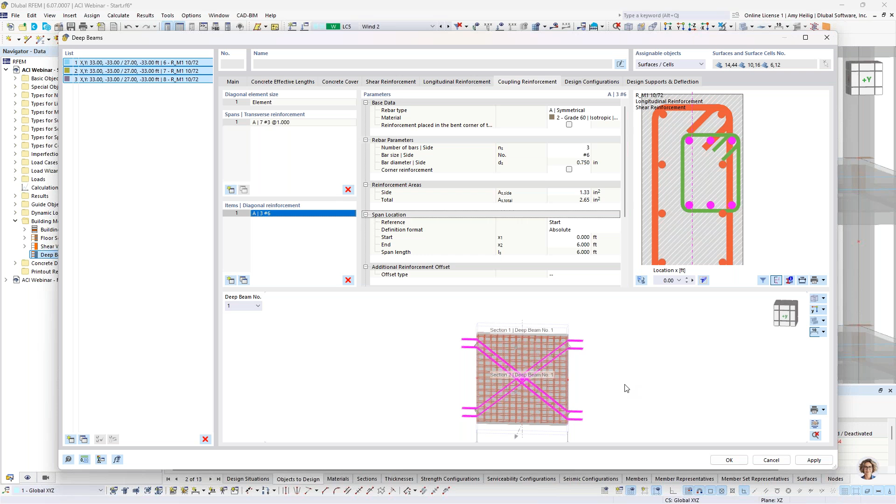You'll notice that we do see the preview update here down at the bottom. We'll go ahead and set this development length to straight on the left side here. And the input is going to be 1 foot as well. Okay, so that will be all of the input here for this diagonal reinforcement. The final thing to do would be the design supports, but in this case, we really just want to consider it supported at both ends, really nothing to do further here. So we'll go ahead and click OK because we are now done with the reinforcement input for both our deep beams and our shear walls.

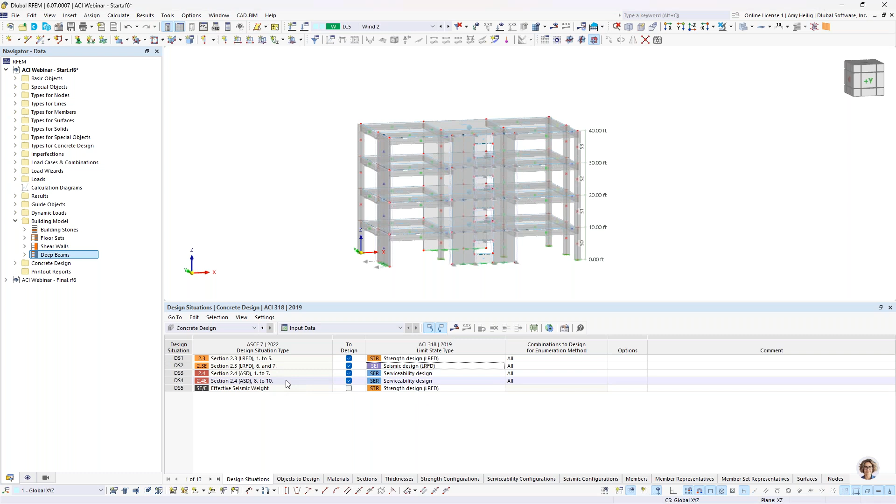Now, if we drop down to the concrete design add-on within table format, we have here the input data. And as mentioned, here are those design situations. So what I'd like to do is to take that first design situation, those factored load combinations that are grouped together, and set the limit state to the strength design LRFD. But then we also have the factored load combinations that include those seismic forces in the second design situation. So therefore, we want to choose the seismic design limit state from our dropdown. So we'll carry out not only the strength design for these load combinations, but also those additional seismic detailing checks that we talked about from chapter 18. We have here 2 design situations for our unfactored load combinations. These are both going to be set to serviceability design.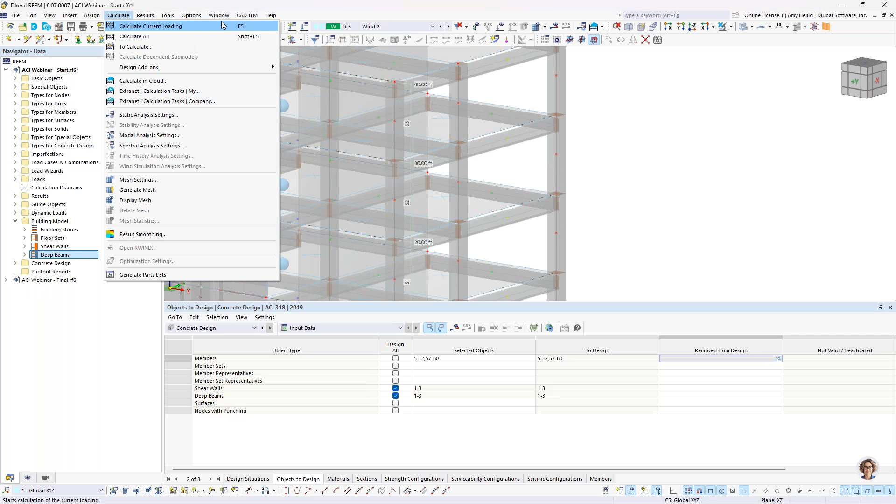Now, under the objects to design, you can see by default, the program just selects all objects within the model, but if we don't have reinforcement input for all of these objects, of course, it wouldn't be possible to design them. So we'll go ahead and leave the design of the shear wall and deep beams active, but for my members, I'm actually graphically going to select here only these frames over on the right-hand side that I have input the reinforcement in directly. So once we're done graphically selecting these, we click OK, and we're now ready to run our calculation. So we would normally go to calculate, calculate all. It does take a few minutes to run. So in this case, I am going to jump to an already saved model where this calculation has already taken place.

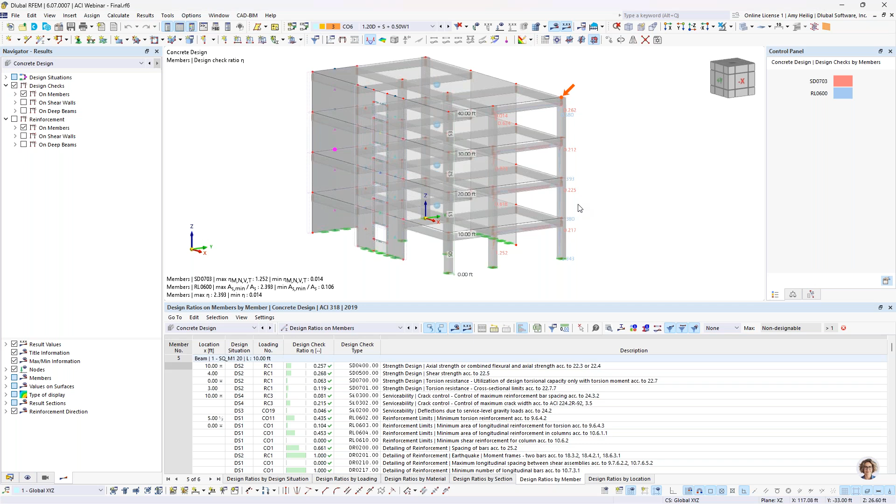So what we would see once we are done within the concrete design add-on is our results available to us in this dropdown where we can view the design ratios on members or shear walls or deep beams. So if we jump to the design ratios by member, you'll notice here that currently, as I'm clicking within this table, we are looking at this top column here. So we can zoom in and you'll see all of the strength, serviceability, reinforcement limits, and detailing checks that are carried out for every single member here. So we can continue to scroll down through this table and see those relevant checks.

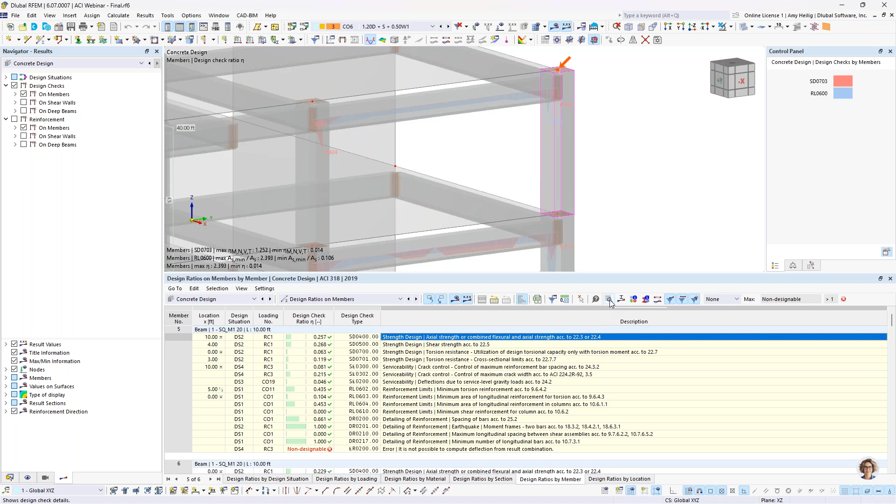Now, for these specific design checks, we can always activate here what we call the design check details. And the design check details is going to show us in detail all of the calculations, the formulas, the variables, and ultimately how this design ratio was calculated. We also see here the design equations and references from the ACI standard, so we can refer to that directly within the code. So again, trying to be transparent in where this information comes from so that you can understand how this design ratio is calculated. Now for our columns, we can also activate here the interaction diagram.

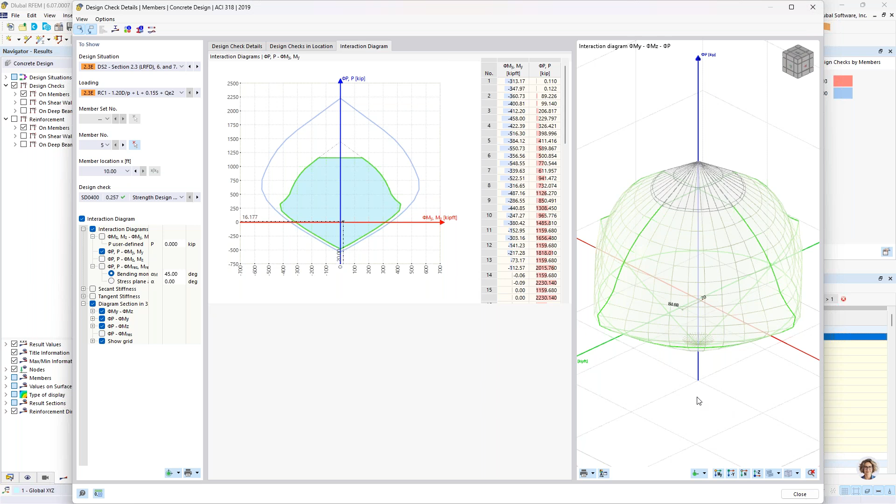So now we get an additional tab up here at the top where we can view this 3D interaction diagram either graphically or in table format. We see exactly where we land within this interaction diagram. So this is certainly something that is user-friendly in terms of adding to our printout report or just understanding that column interaction diagram, again, the results presented here.

The same concept for our rib members. So notice as I graphically select one of these rib members, the table will go ahead and jump to that relevant member here. All of the design checks are shown here within table format. The design check details are available if we'd like to take a look at the references, code equations, and things such as that. Now jumping to the design ratios of shear walls.

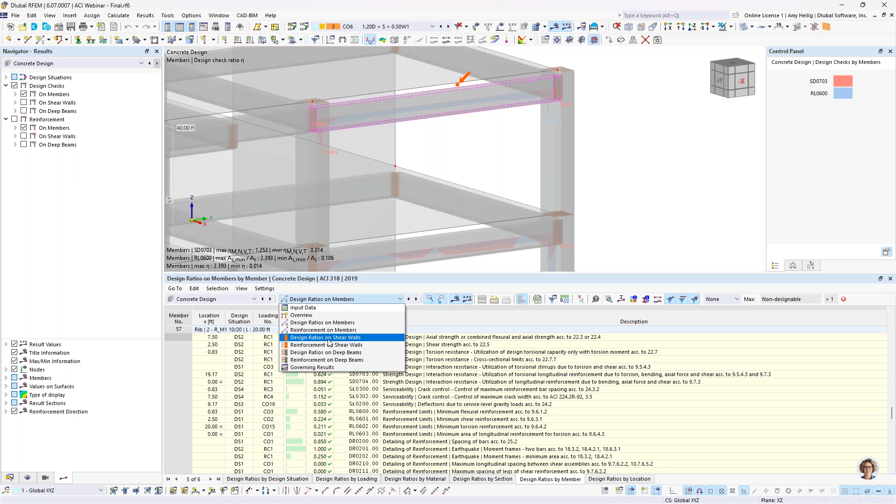So if we zoom out here, you'll notice that we're currently looking at our first shear wall. And again, all of those same design checks. However, we're carrying out the additional checks according to Chapter 11. We'll also see here some of those seismic detailing checks included. Again, similar to the member design, we can activate here the design check details to see exactly how this design ratio was calculated with the reference formulas here.

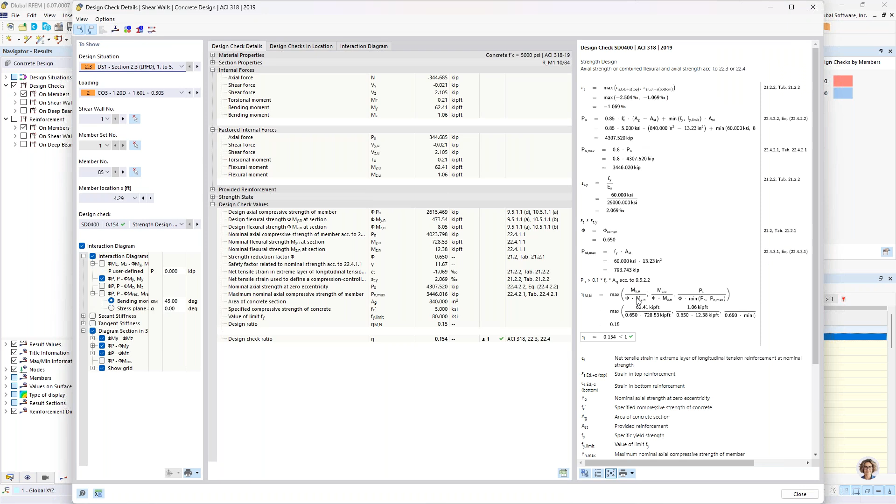Same thing for the design of the deep beams, of course, that we have designed. Now, everything is shown in table format, but it's also possible to show this graphically as well. So for example, if I jump here to a wireframe view and we're looking at this deep beam that's spanning in between the two openings, well, we can turn on the design check ratios here for our deep beams, maybe not necessarily the overall ratio envelope, but rather for each strength limit design check, I can go ahead and turn that on graphically.

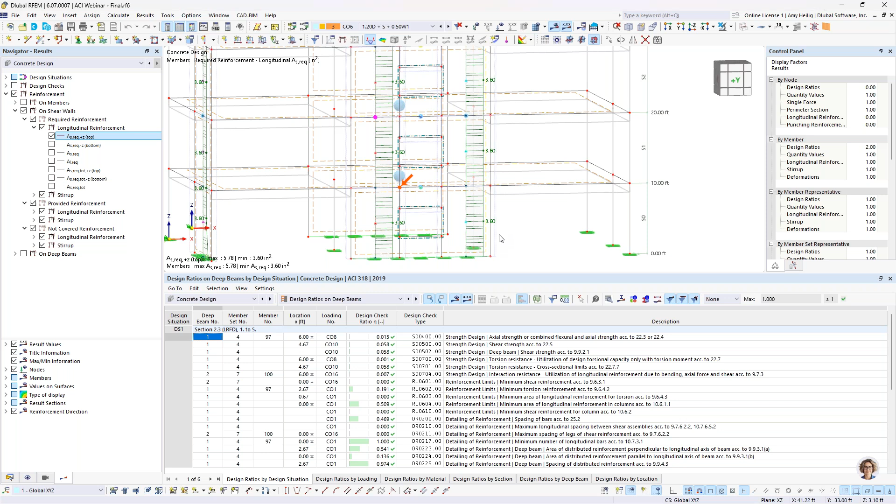And you'll notice that we can actually overlay these different design checks of this deep beam graphically as well, depending on which design check that we are displaying. In addition to the design checks, what you'll see here is the ability to display the reinforcement. So we'll go ahead and turn on the reinforcement display for shear walls, and I'll go ahead and zoom out here. Well, for my shear wall, I can display graphically the required longitudinal reinforcement. So this is the reinforcement that's required from the static analysis.

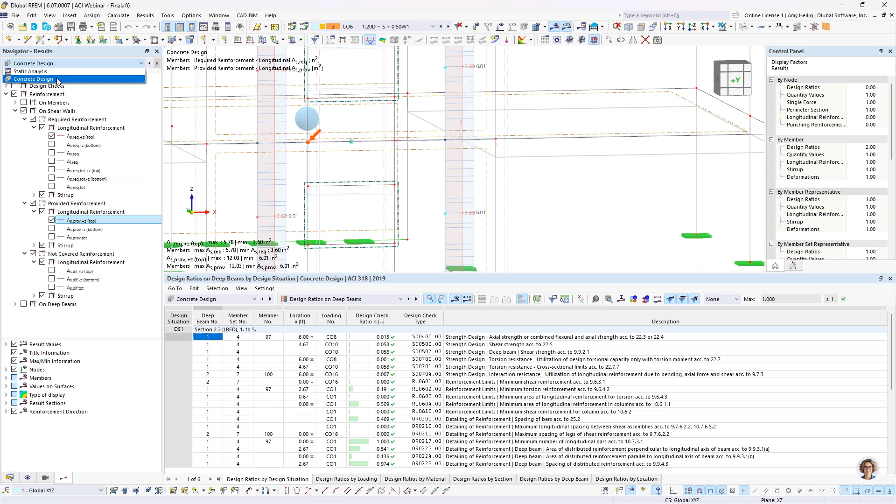I can overlay this on the provided longitudinal reinforcement. So ultimately, we hope that the provided reinforcement is greater than the required reinforcement. And if not, we can further display here what we call the not covered reinforcement. So again, in addition to all of the table output, a lot of graphical options here under the concrete design add-on. Now, the very last thing I want to do is to actually back up to the static analysis.

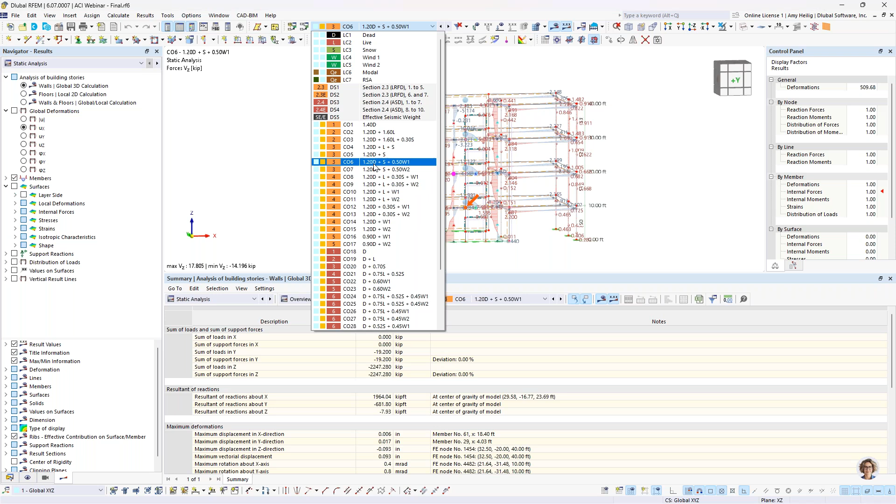So we were currently just looking at the design results within the concrete design add-on, but we can easily toggle here to the static analysis and choose one of our load combinations. So for example, I'll choose load combination number 6, which is dead plus snow plus wind. So we'll go ahead and turn on the display here of our structure. And you'll notice that because I have defined that semi-rigid diaphragm, or if we had defined a rigid diaphragm, we have the additional settings up here under the static analysis results, including that 3D calculation.

So again, we're calculating in a 3D environment, all elements are considered. We're running through all of these load combinations here, both gravity and lateral loads. We're just going to modify the diaphragm stiffness for this global calculation. In turn, we can toggle here to that local 2D calculation. So you'll notice that we're only going to see results here for the floor elements themselves because we're extracting each one of these floors in a separate submodel. We're placing those line and nodal supports, and then we're going to apply the actual stiffness of the surface element itself. And we run through, again, all of these load combinations.

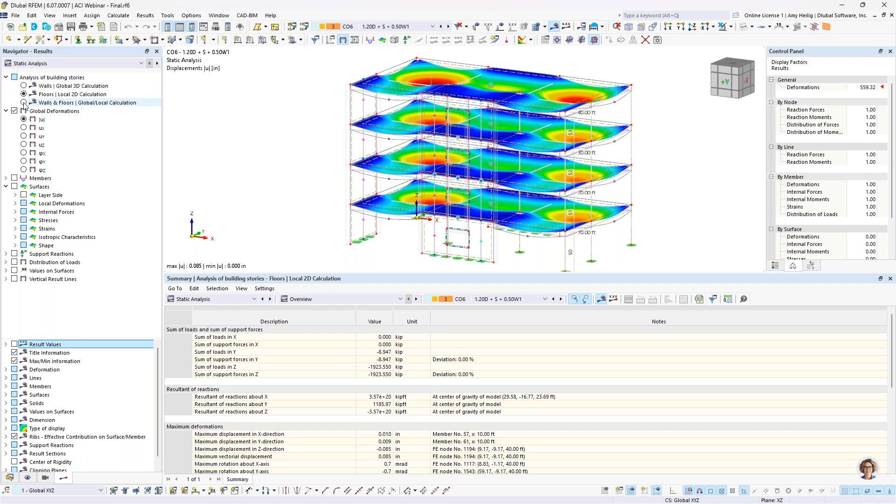Now, what's nice is that I don't have to sit here and try and interpret the results between the 3D versus the 2D, but we have this third option available. And this is going to combine both the 3D and the 2D results by adding them together and presenting it here graphically as one result. So again, very powerful that we're not just looking at gravity versus lateral. This is everything combined together. And not only graphically can we view these results, such as member internal forces, surface internal forces, but also in table format as well. We'll see those results change depending on which option we have selected here.

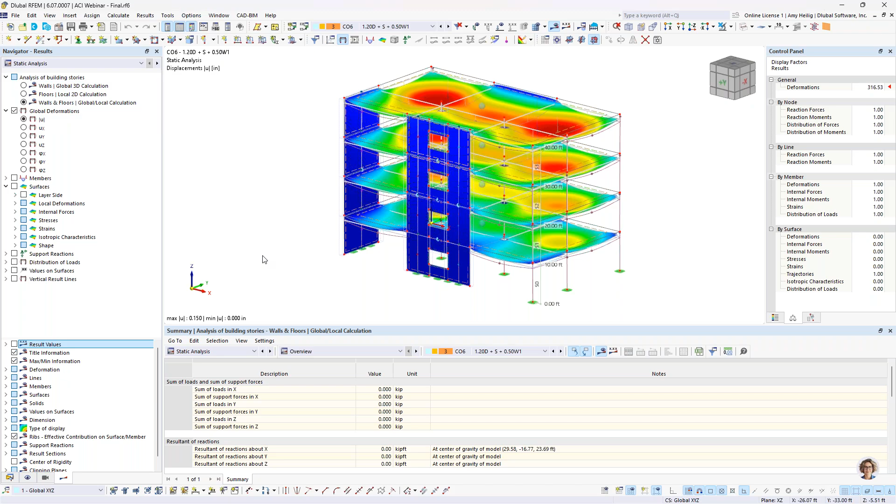Okay, so we'll go back to the PowerPoint here just to conclude our presentation today.

As mentioned, we're working on that two-way punching shear reinforcement input. Currently the program just flags you if that reinforcement is required, but there's no way to input it. We will release that option in the near future, including for stirrups and headed shear studs.

In a similar manner, the shear wall boundary element reinforcement input. We're running this design check for shear walls, but we only flag you if that boundary element reinforcement is required. So we want to add an easy input option under the shear wall to input that reinforcement.

As mentioned, for those RSECTION sections, those custom cross sections, we want to continue to allow additional design checks beyond bending, as well as additional seismic design checks. Currently we're just doing seismic detailing within the concrete design add-on, so we'll continue to elaborate on additional seismic checks like strong column and weak beam.

Nonlinear concrete design is currently in development. We previously had this in RFEM 5, but we're really improving it for RFEM 6, where we can account for the true cracked cross-section properties for both members and surfaces, and then consider that modified cross-section in both the static analysis and the design.